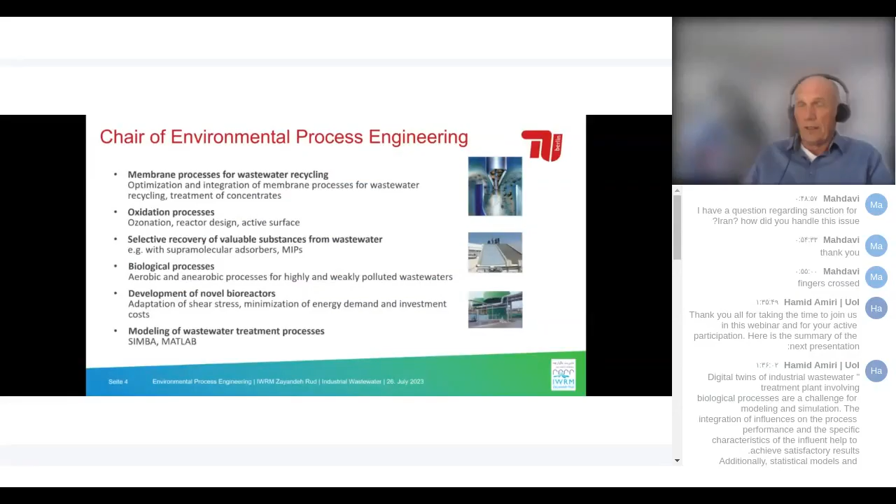Okay, thank you very much. A short introduction into the activities of the chair. So very briefly, I guess you all know these processes.

We are working on membrane processes for wastewater recycling, different types of membranes, also in combination with electric fields like electrodialysis or electrodialysis metathesis, but also conventional membrane separation like microfiltration, ultrafiltration, and in particular nanofiltration to reverse osmosis. We have a long tradition in the field of AOPs, advanced oxidation processes, where we also developed systems for efficient dissolving of ozone into water, and catalysts for ozonation and applying H2O2 in combination with iron, the so-called Fenton process.

We'll hear more details about selective recovery of valuables from wastewater, a field where we've been active for more than 10 years, trying to separate selectively substances which have a certain value out of effluents. This solves two challenges: one is that pollution of the wastewater is reduced, and secondly the financing, because wastewater at the end of the day costs money, and no one is really willing to pay for it, except if you have legal requirements or a shortage in water supply.

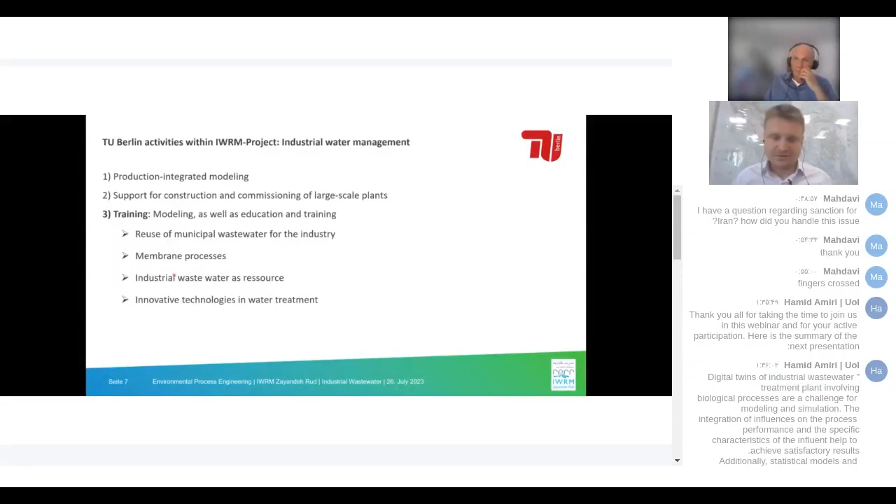I will continue with presenting 3 innovative industrial wastewater treatment systems that we have dimensioned, built, and planned in the last 3 years: the project InnoVa in Tunisia, the project SUSPIRE in Tunisia, and the project HighRec in Qatar and Iran.

Afterwards we have the presentation by Professor Geißen. He will present some key topics of industrial wastewater and especially wastewater reuse, looking at different perspectives.

My colleague Norman Schweimanns is an expert for automation and digitalization. He will talk about a digital twin for industrial wastewater treatment plants, a possibility to not only react but to predict operation parameters. This is very interesting, for example, for energetic optimization, or also for the reduction of chemical usage.

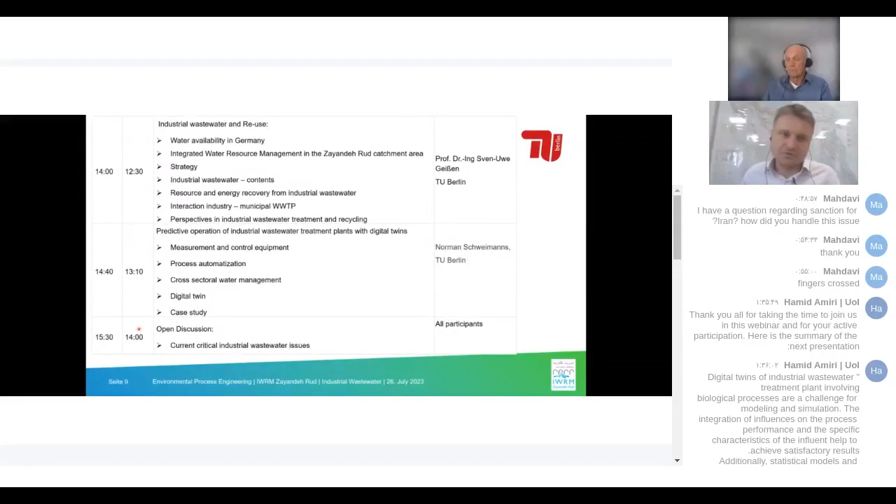And we will finish up with an open discussion, ask the experts. We have the opportunity to share ideas and discuss points.

Okay, thank you. I will now begin my presentation on the containerized industrial systems.

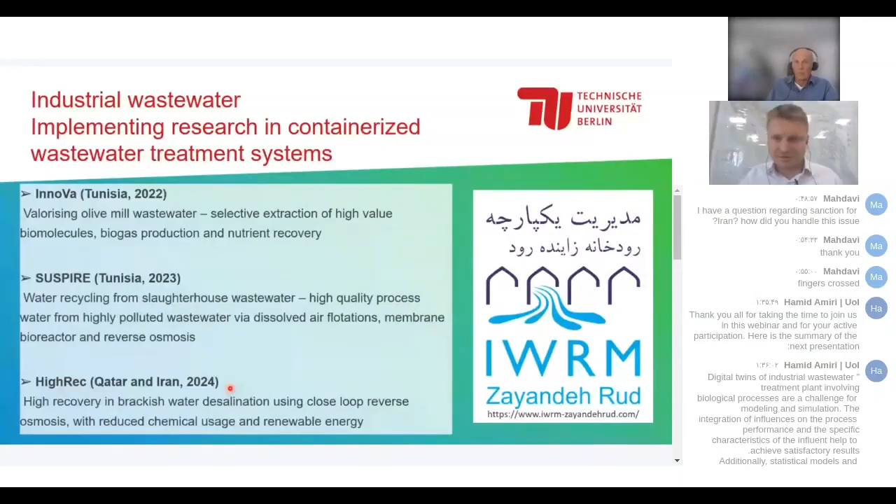So InnoVa. InnoVa started in 2020, due to Corona and other factors, shortages of supplies. It took 1.5 years to finalize the pilot plant. In February 2022, last year, we managed to import it to Tunisia. And in the last season, we began production in October, we treated about 12 tons of olive mill wastewater. The project is between TU Berlin, represented by Professor Geißen, and a long-term partner, Professor Sami Sayadi from the Center of Biotechnology in Sfax.

The process was awarded the German African Innovation Incentive Award. It's an award for very innovative research from Africa, sponsored by the Federal Ministry of Education and Research, Germany. The project is managed by the DLR. We worked together with a company, Delta Umwelttechnik. They constructed most of the system, and we had support by Endress+Hauser, which is a known company, I guess, in Iran as well. Artec Innovations, a ceramic membrane producer, and many other companies.

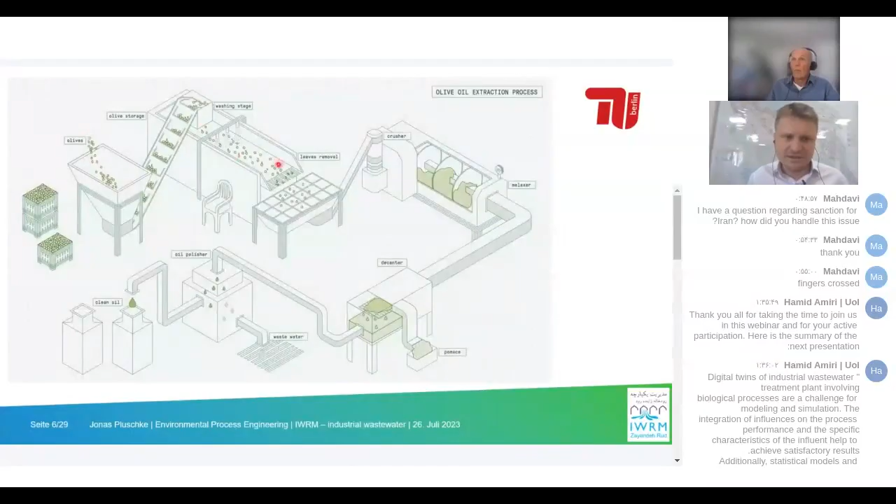So what is olive mill wastewater? We have to briefly look at what is olive oil production. We begin with olives. After storage and washing, you need to remove leaves and then crush the olives. The crushed olives are malaxed, so mixed at a certain temperature for some time. And then at some point, a decanter or centrifuge will remove the oil from the solids and water. So at some point in the process, we will find wastewater, and this is the wastewater we try to treat.

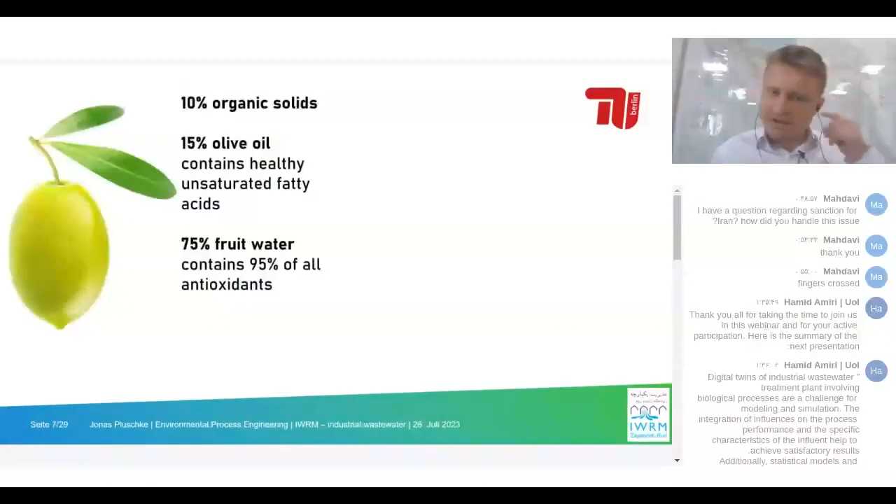What is olive mill wastewater specifically? It's the fruit water or the juice. The olive is a pretty dry fruit. It grows in very dry, arid areas. And to cope with the stress from dryness and the stress from UV light, it produces a lot of oxidants, antioxidants, and these can be found in the fruit water.

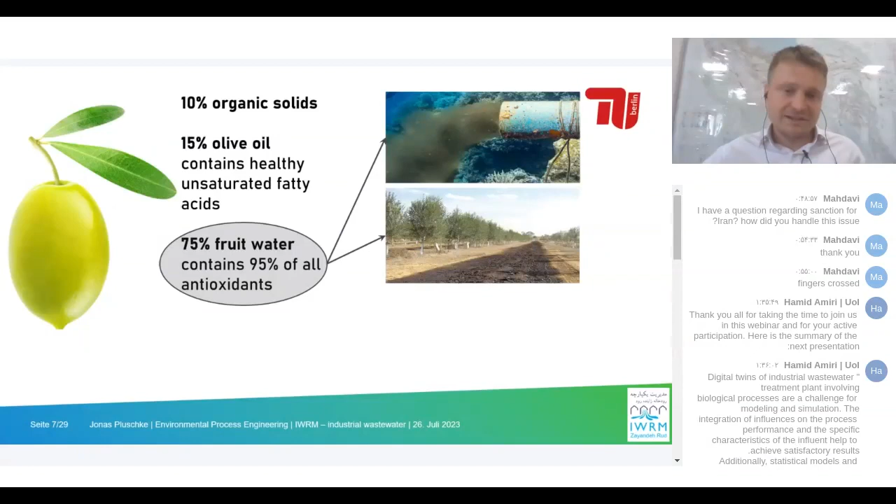What are the current solutions for fruit water or olive mill wastewater management? The main or a classical one is disposing it untreated into water bodies or the Mediterranean Sea. A method which is still applicable for small-scale farmers is using it as irrigation water in olive groves. This is possible as long as you don't have intensive agriculture. If you reach a certain intensity of the olives, the soil will be damaged. You have salts, you have fats, you have the accumulation of biomolecules, and in many areas in Spain, for example, or in Palestine, I know examples where the soil is degraded so much that it cannot take up any water anymore.

And then a method also very well known in Iran is the evaporation pond, often used for reject water from RO systems. This water in Tunisia is often also discharged in large evaporation ponds, and the arid climate reduces the volume to more or less a solid.

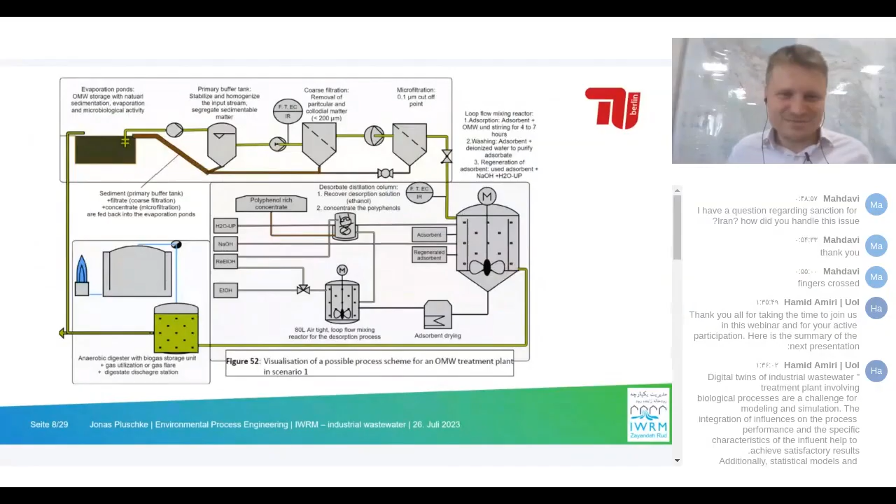So this is a flow scheme I prepared in my master thesis. It looks a little bit rough, but this was the first plan on how can we valorize this wastewater. Simplified, we have a storage of the raw olive mill wastewater. If needed, enzymatic treatment is possible to degrade large polyphenols into smaller monomers of higher value. Then we have a mechanical treatment and ultrafiltration. We upgraded the system so that these components are now also used for the anaerobic digestion.

The permeate of the ultrafiltration, about 70-75% of the initial amount, is given into an adsorption column, and the bulk will afterwards go into a storage and be the feed for the anaerobic digester for biogas production. In many other countries, the gas prices are much higher than in Iran, and so the production of biogas is often an economically viable option.

The reclamation of the polyphenols is then done on the adsorption column. We use an organic solvent to desorb our target molecules and further purify and concentrate them.

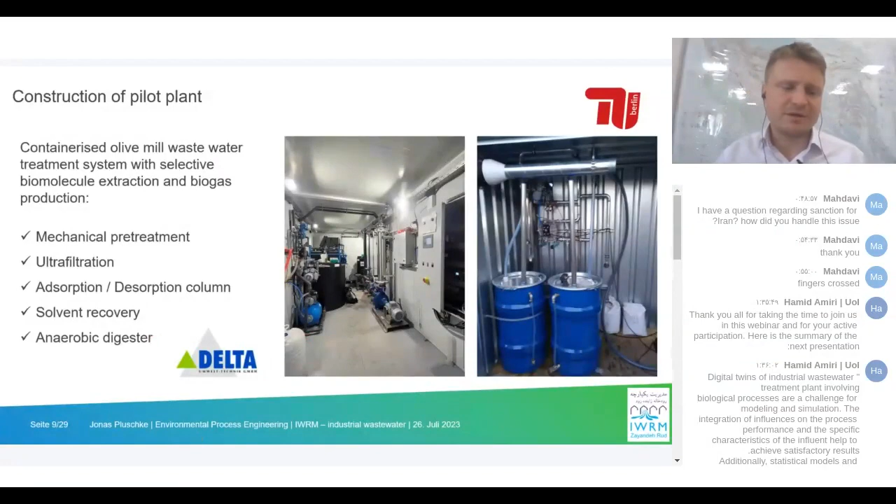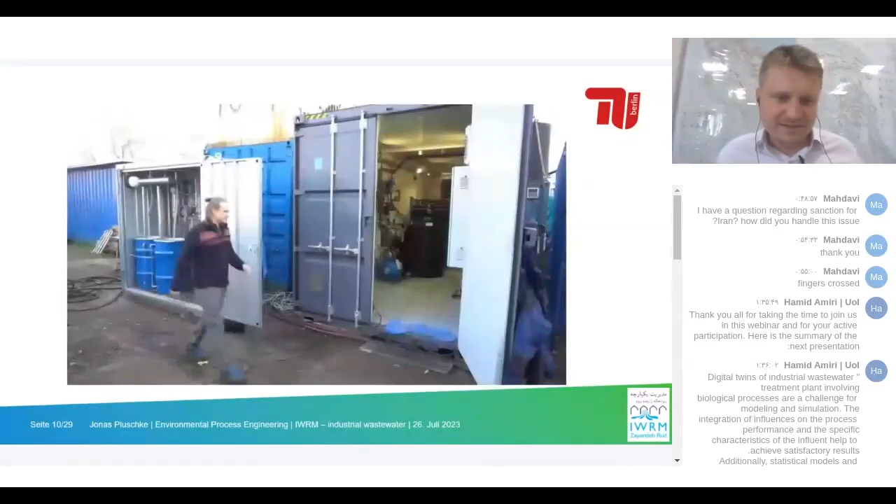This is a very short impression of the system in Germany before shipment. As you can see, it was a bit cold.

So these are some impressions of the system before the export to Tunisia. In June last year, we had an opening ceremony with many stakeholders from different areas of Tunisia and different backgrounds.

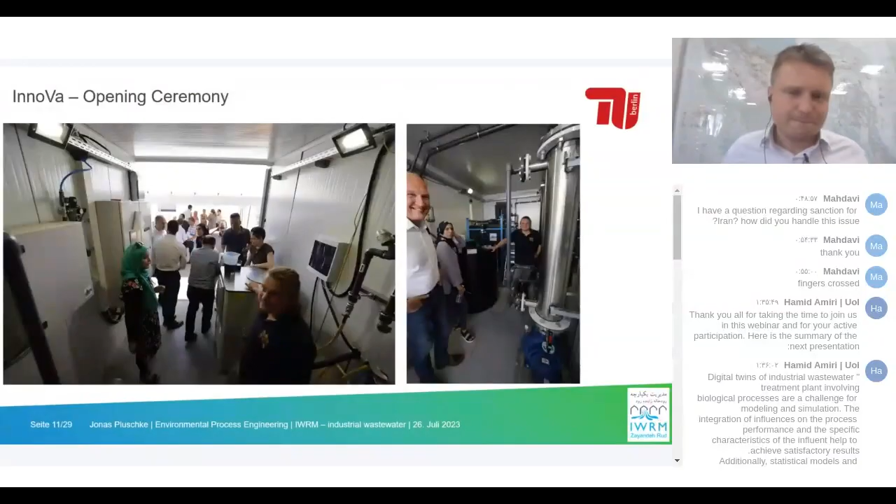And we finally could begin operation. The olive mill season begins in October. In November, we started with a team of 3 master students from Germany and the team from Tunisia to start learning on the real life application of the process, and started optimizing as well.

And the goal was achieved. We managed to recover polyphenols of high value, and we're currently still trying to further purify them with different assays and trying to find commercialization, finding a partner to utilize them on an industrial scale.

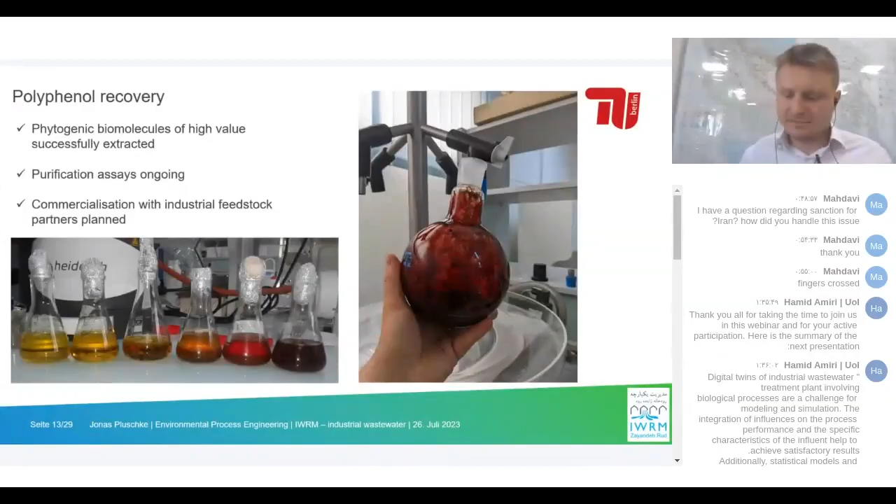Masoud and Hamid, do you want to translate at this point? Thank you so much for your nice presentation. Yes, of course I can do it.

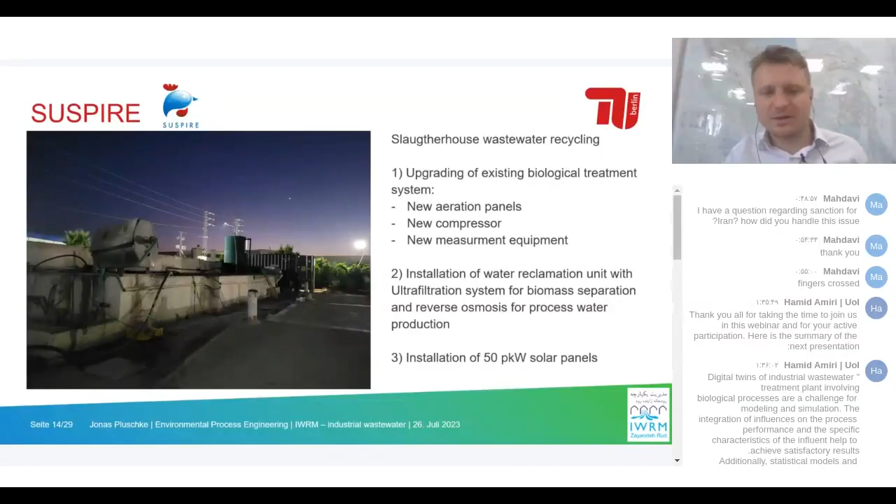This is something that I recommended already to a lot of my Iranian partners and that I had a chance to talk to. Solar panels are able to produce very cheap electricity, and we try to improve the sustainability of our systems, for example, by incorporating solar panels. We installed about 50 kilowatt peak together with our industrial partner.

So this is Maximilian Philipp. He had his first child this year and was on paternity leave, and I took over in the crucial phase of installing the system. The idea is using process water for the slaughterhouse.

This generates wastewater. Then we have a mixture of a flotation and MBR system to treat the organic components and remove most of the nutrients. So we are left with water that mainly contains ions, and we use a reverse osmosis system to produce high quality process water, which can then be used in the process again.

Meanwhile, we try to use biogas and photovoltaic to generate energy for the process and use the residues for agricultural purposes.

The project is funded by a line called TUNGER 2+2, meaning we need two Tunisian partners: one research partner, the Centre de Recherche et de Technologie des Eaux, a research center about water, and one industrial partner, the slaughterhouse. Then we have two German partners, TU Berlin, represented by us, and Delta Umwelttechnik, the site constructor. The whole project was financed by the Federal Ministry of Education and Research Germany, as well as some funding by the Tunisian side. The DLR is the project coordinator.

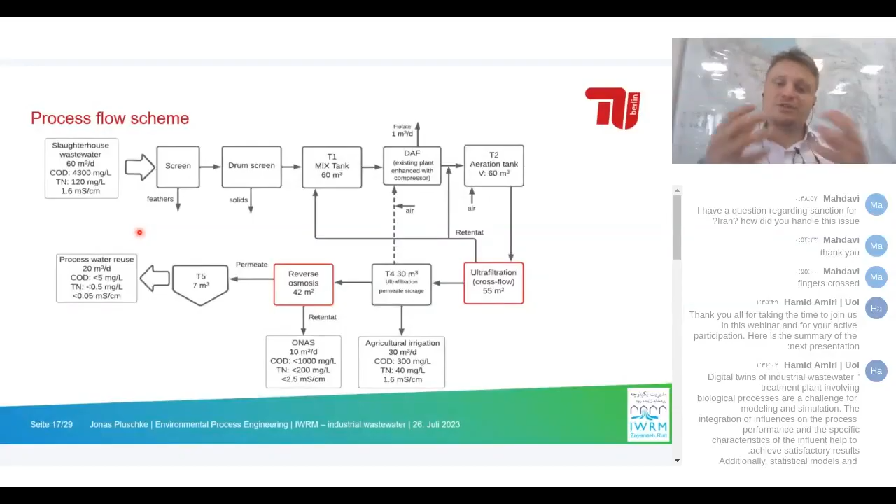So this is the flow scheme. We have a typical slaughterhouse wastewater with about 4 to 5 grams of COD, about 60 cubic meters per day. It's small scale, decentralized - this is one of the ideas. One advantage of decentralized systems is the water system in general becomes more resilient. The direct opposite is, for example, bringing desalinated water from the Persian Gulf. This is a very centralized system, and if you have issues with the desalination system or the pipeline, a lot of issues can be created. With decentralized systems, the general system can react to change a little more easily. That's why we are interested in researching and providing case studies for these decentralized systems, even if they might be less economic to a certain degree.

The wastewater is given into a mechanical pretreatment, a drum screen. We have a homogenization tank, then a dissolved air flotation, a process I am a big fan of, because depending on the wastewater, you can remove a large amount of organic matter with very low usage of chemicals, if at all - some DAFs work perfectly fine without any chemical addition. Then we have an aeration system, an ultrafiltration for recovering the biomass. The permeate of the ultrafiltration is given into a reverse osmosis system, producing about 20 cubic meters of permeate per day, with a goal of 50 microsiemens per centimeter.

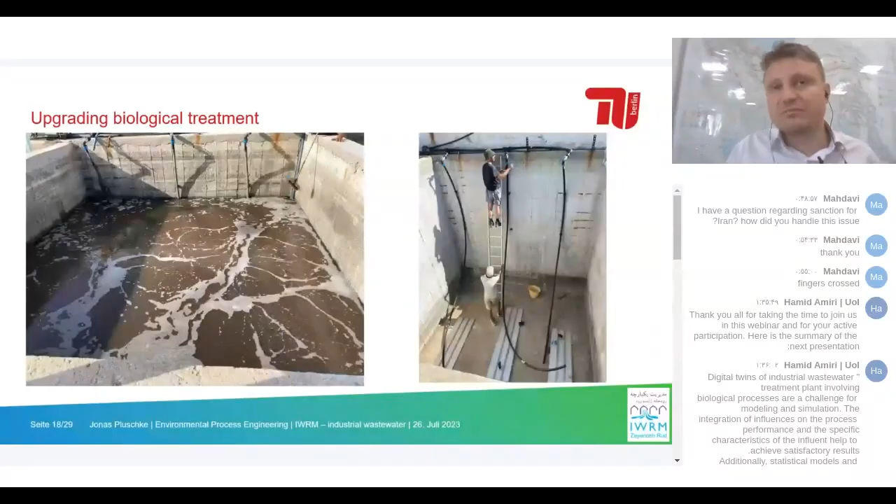So these are images from June. One of the important works was installing the new aeration panels - high-tech aeration panels from Germany, which use membranes to diffuse very small bubbles and have maximum efficiency in oxygen transfer from the air to the liquid. So we were able to produce a much more efficient system by increasing the oxygen transfer.

Because we're a university, we always have a component of teaching. So in the beginning it always looks a little rough, but we always try to bring students with us to give them the opportunity to have real-life application experience. My experience is that students profit a lot from participating in such projects.

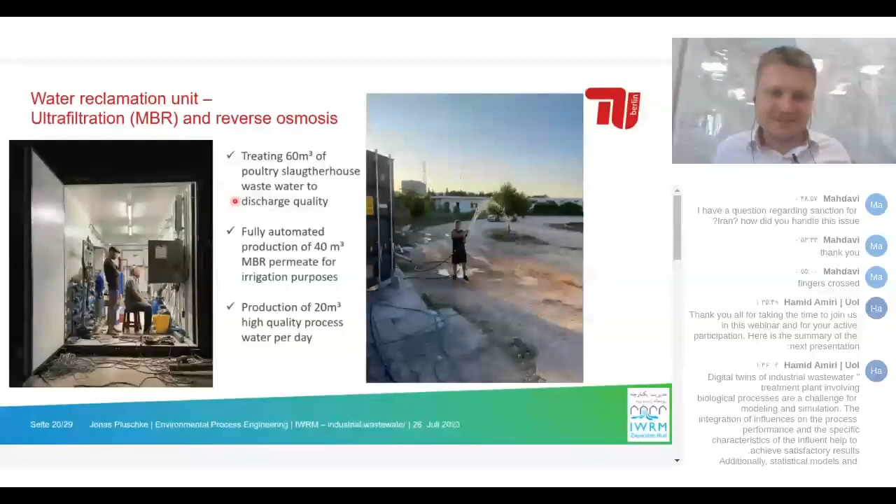We are able to treat 60 cubic meters of poultry wastewater to a discharge quality much better than before. We have a fully automated production of 40 cubic meters of MBR permeate, which is quality-wise definitely good for irrigation, still containing some nutrients. And about 20 cubic meters of high-quality processed water per day is what's possible at the moment. We try to increase this value, but for now we are happy with the system as it is.

Okay, do you want to translate again?

This is the last slide for SUSPIRE.

Thank you, Jonas, for your very nice presentation. As I remember, we had the discussion last night about the translation, and I see the audience is mostly postgraduate. Last time there was a correspondent from a news agency and I was forced to translate, but I think if the audience has any ambiguity or anything unclear they want clarified, they can ask the question. I suggest we continue because the slides and your speech are all clear. Wonderful, thank you, thank you.

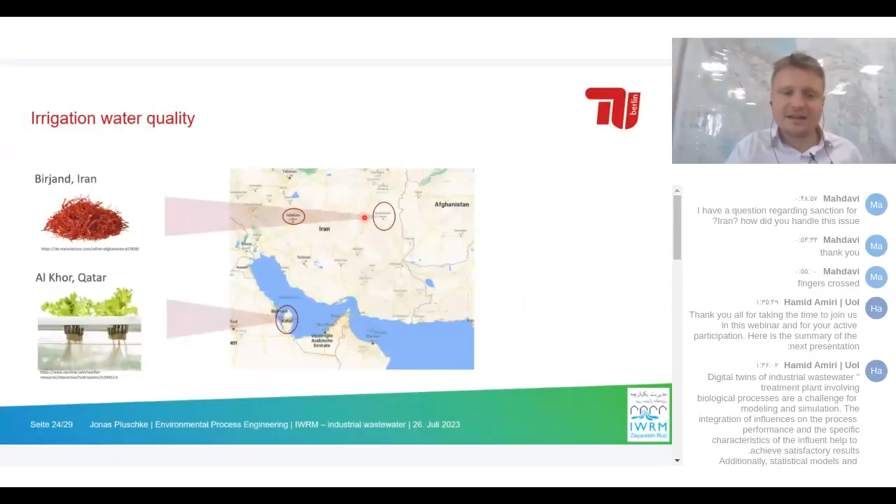So there's two regions where we're going to test our system. One is in Al Khor in Qatar, which uses hydroponic systems for the production of vegetables, and already has a desalination system running, so we can compare the performance of their system and our system. And then the other region, in eastern Iran, is Birjand, for the production of saffron.

So these are just the key points of the HighRec project. We want a highly flexible solar-driven desalination system, so the flexibility of the system is important. We want dynamic adaptation to changing raw water compositions.

This is something we learned, or was new to me, that the water composition in the groundwater can change over a year in certain cycles. And then we have the concentration of the concentrates to the maximum possible, to a threshold salinity, and therefore maximize water recovery.

And the focus points are the chemical reduced pretreatment technologies. So we are looking at electrodialysis metathesis and capacitive deionization, ion exchange systems, or nanofiltration. We had a very successful project where removing hardness using nanofiltration was a good option. Then technical and economical evaluation of minimal and zero liquid discharge concepts.

And of course, we always try to have a holistic technology transfer program with operational and maintenance courses to have a sustainably running system.

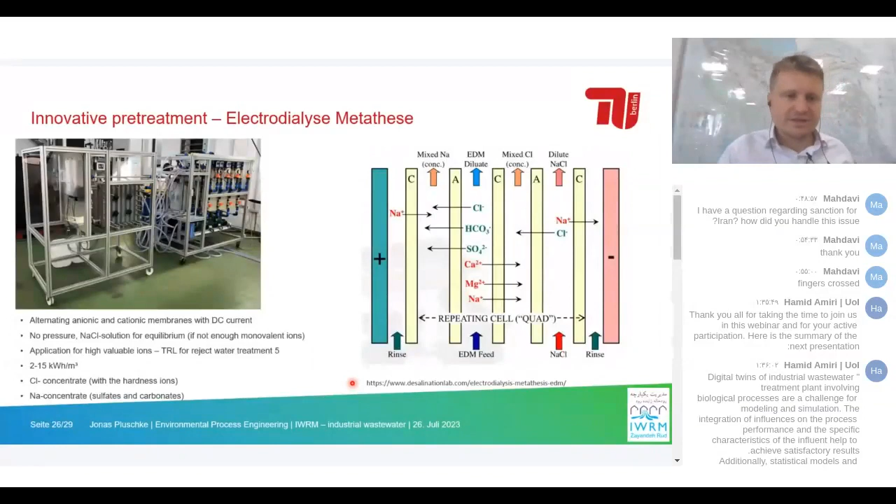Just one example of an innovative pretreatment: we are looking at electrodialysis metathesis. It's a process that uses alternating anionic and cationic membranes and a DC current to separate charged particles or ions. It doesn't use any pressure, which reduces fouling a little bit, and is used mostly for high valuable ions.

But with increasing technology readiness level for the system, we're starting to see applications for reject water from reverse osmosis systems. The value was given between 2 and 15 kilowatt hours per cubic meter of treated water. We end up with a chloric concentrate, which contains all of the hardness, so calcium, magnesium, and sodium, and then we have a sodium concentrate, which contains the sulfates and carbonates.

So we managed to separate the divalent anions and divalent cations before going into the membrane, and many times calcium, magnesium, as well as sulfate are the ions that will produce scaling. In some cases, silica or other ions can be an issue, but this is a good pretreatment to remove hardness or to separate the ions.

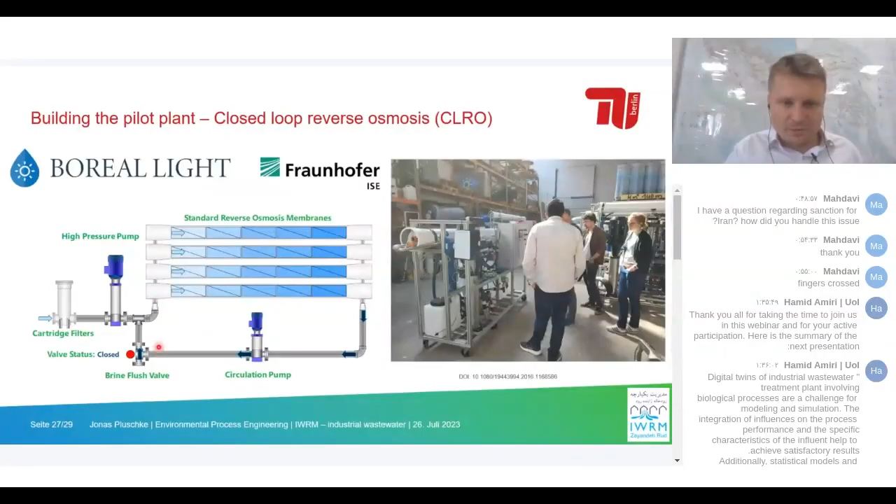So we started constructing our closed loop reverse osmosis system with the company Boreal Light. The idea is you have a normal membrane system, you concentrate the feed and circulate it. The whole time permeate is produced, and the salinity in the feed increases step by step. Instead of doing 2 stages or 1 stage, you increase the pressure step by step, and you can go much higher than with a single or two-stage RO system. So the brines can go up to 100 grams TDS per liter.

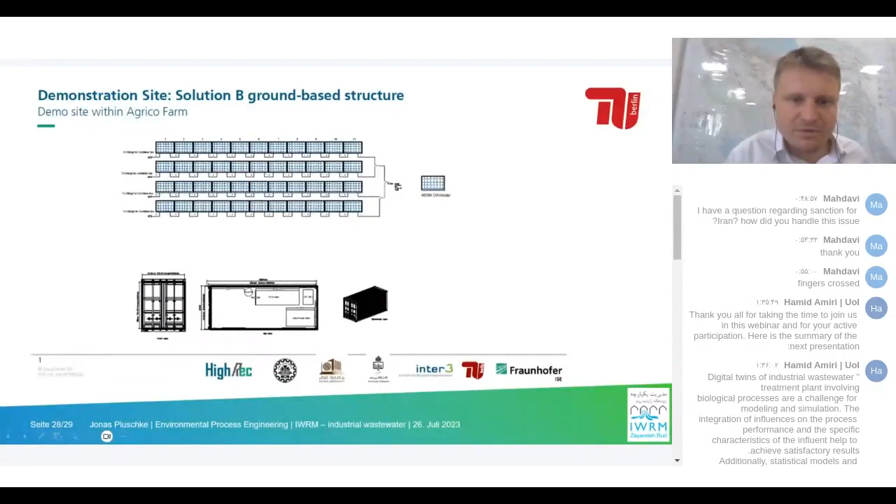This is the plan for the HighRec system. We want to bring about 50 kilowatts of solar panels, and the whole rest of the system will fit into a 20-foot container.

I want to thank you, and I am open for questions if there are any. Merci.

Thank you, Jonas, for your nice presentation. I think you can ask questions, and I have some questions too, for the MBR system, as you said, in the slaughterhouse as well as in Tunisia. It was interesting, both the olive mill and slaughterhouse.

I have a question on the MBR system, which, as you said, is an external system, but many books or references preferably suggest the submerged system. I want to know why you chose this system at the design stage, and how did you manage the fouling problem, because it's not submerged and it's outer?

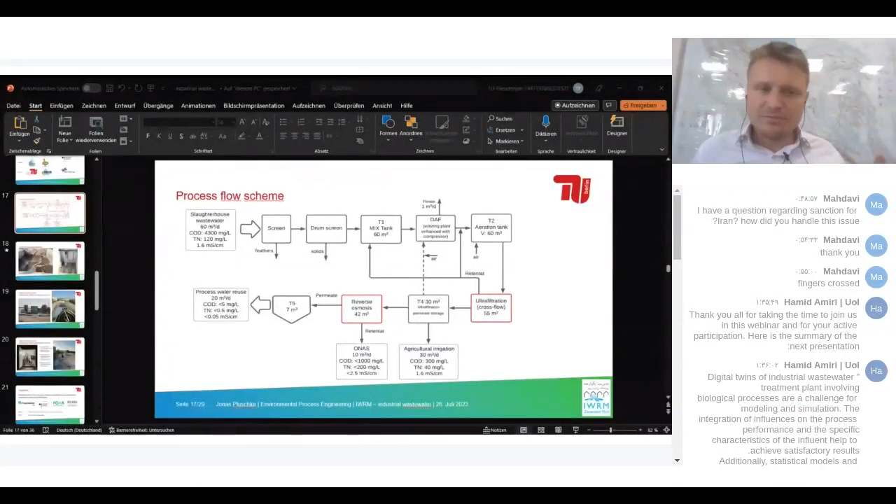The cleaning in place is much easier too, because you don't have to take out all of the membranes and put them into a separate smaller tank. You can just empty the system, fill it with water, and use the installed CIP system to more or less regularly chemically treat the membranes. So these are just two points which have an advantage.

In our case, it was also because we are in a rural area of Tunisia. It's a decentralized system, and we will bring high-end technology. Installation of submerged membranes is not very simple. If we do it separately and already finish installation inside the container, the whole system is ready to go once the container arrives, more or less. So these were a few of the reasons why, in our case, it made sense.

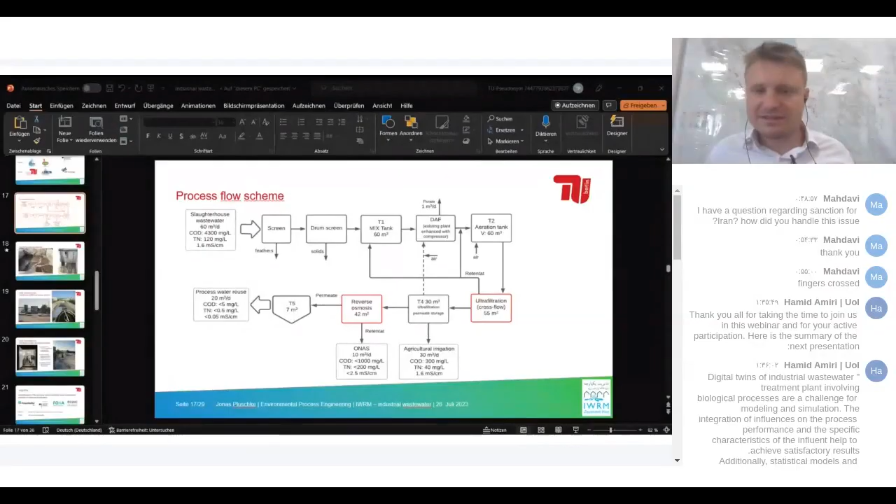How much was the MLSS of your system? Yeah, so for aeration tank, we began at a very low rate, of course, and our calculations were based on 10 grams. That's what we based this whole system on. Do you want to add something?

Yes, I think that's a general question. You're completely right. Now, whether to choose a submerged system or a cross-flow system.

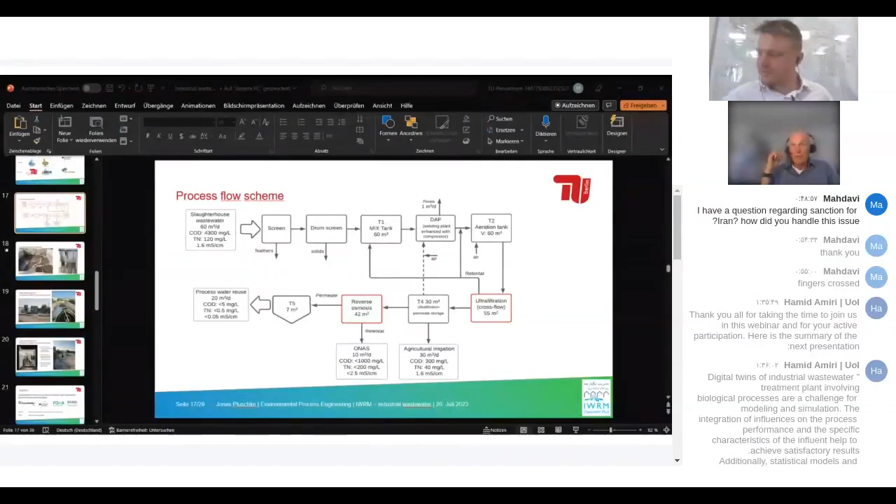From experience, I think with both systems we started in the 90s with cross-flow systems in the treatment of landfill leachate wastewater effluents, and then we moved into industrial applications, and then finally also municipal applications. But basically, submerged systems have the great advantage that they are much cheaper and have less energy consumption. But you need more surface area for sure.

So the specific flux through the membranes is, for submerged systems, in the range of 15 liters per square meter an hour. And for cross-flow systems, about 80, 90, and in the best case, above 100 liters per square meter an hour. But they are consuming more energy.

But they are much more resistant, as Jonas just said, against the layers. So the layers can be better controlled. So if you have any concerns about the deposition of substance on top of the membranes, you should use a cross-flow membrane filtration system.

So for me personally, to keep it simple: for municipal wastewater, every time, if you would like to install an MBR, use a submerged system. For industry, usually apply a cross-flow system, because it's much better to maintain. The maintenance is easier, as Jonas just mentioned, and so is the cost.

Finally, the higher energy cost is not so important in the industry because we're talking about smaller flow rates.

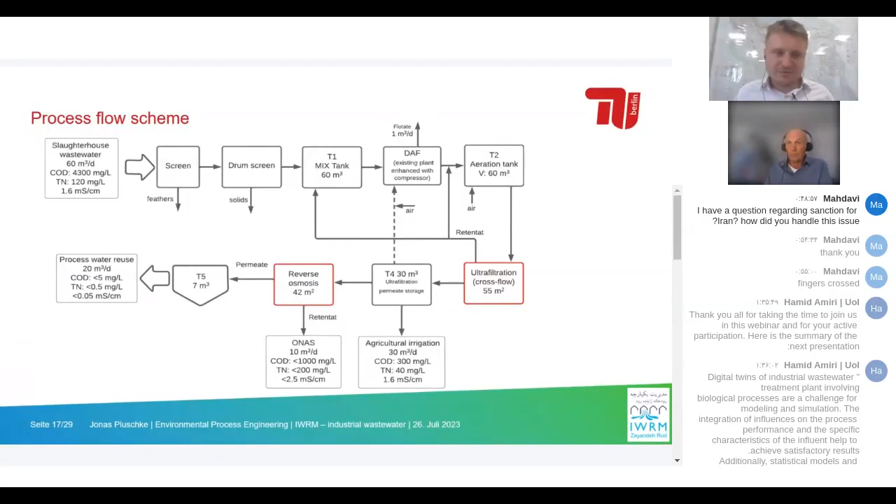We visited, as Professor Geißen may know, one of the industrial plants in Isfahan operating a submerged system, and Jonas suggested converting it to a UF system. It was our question how to change it, and I had some suggestion to change the system from submerged to external.

Maybe I can explain really quickly because it's a very interesting case. They are currently using 2 grams MLSS in their MBR system because they have an aeration tank and a whole biological treatment in front of the MBR system, so they go in with a very low concentration. My thought was to just separate the biomass with sedimentation before the MBR system and use the MBR as an ultrafiltration system without biological treatment.

Okay, thank you. I'm not sure, but this has a disadvantage in that you're separating out the good settling flocks, the large-size flocks, and leaving the single bacteria for the MBR. This might cause a very condensed deposit layer at the MBR, because the particle size is smaller. You're making a particle size separation in sedimentation.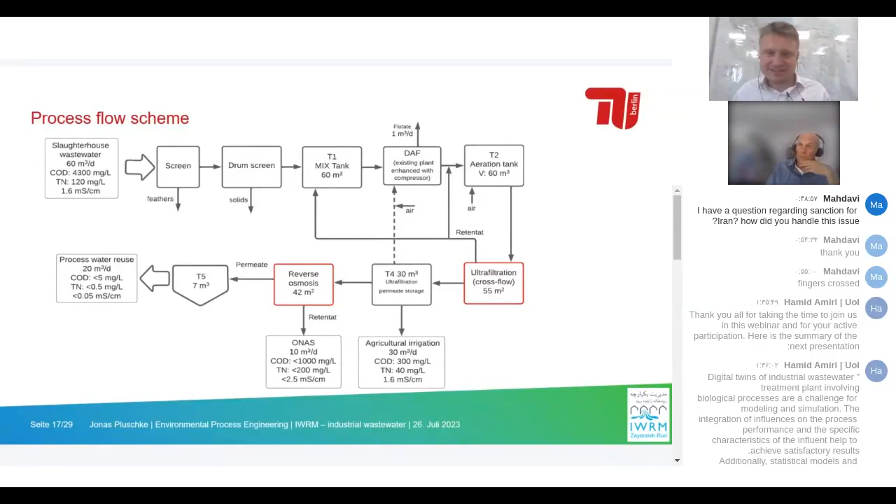The pilot will go to Qatar by the end of this year, and we will see if the sanctions allow importation to Iran or not. We still have to find out.

I think it should be no problem. So the information so far is that it should be no problem, because it's not dual use, and secondly, it's research. That's the information we've received so far. But let's wait - we do not have a final decision on this issue.

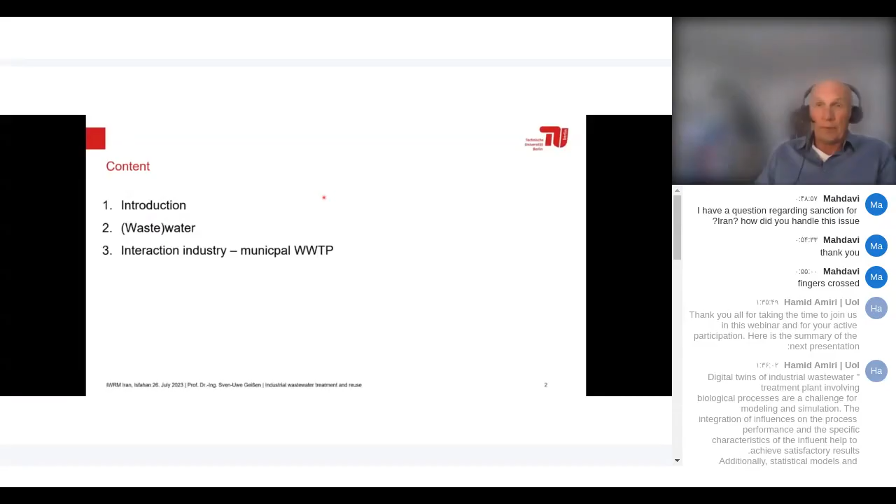Moving into my presentation, I will start with an introduction. I will give you an overview on wastewater or water, because water is contained in wastewater, and that's something we have to address. And last but not least, the interaction between industry and municipal wastewater treatment plants is also quite interesting to discuss.

So, introduction. I already mentioned what we are doing, but I would like to give you an insight into what exactly we do in many applications. We are starting with these kinds of plants. It's acrylic glass, so you can see inside a bioreactor, not filled with biomass at the moment the picture was taken. But it's very important for us to have insight into the system, to use our senses: our eyes, our nose, our ears, and our taste in some cases—even in most cases not for the wastewater, but sometimes you should use your taste too.

We have highly sophisticated measurement devices, but our senses, the human senses, are unbelievably good. But this is not the story I'd like to tell you.

I just like to address that we are moving into the scale-up, the integration into practice—that's challenging. We are talking here about a water column height of about 1 meter, and in this type of reactor at full scale, we are talking about a water height of approximately 12 meters. That's what we are doing: transferring technologies from the lab scale, bench scale, into practice.

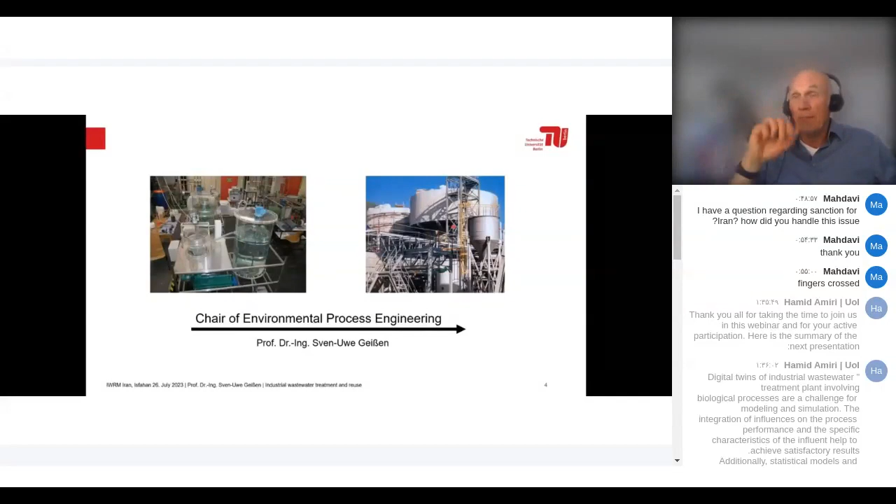So you have seen some examples, and hopefully in the future the examples Jonas gave will also be installed at full scale, without external funding, just with private money.

So, what is the water situation in Germany? We have summer now, and just today there came some news with respect to our groundwater level. Even in Germany, there are many concerns about groundwater and water supply, particularly in the region around Berlin. The spokesman of the Greens gave a short sentence: it was last year, when we had such times of water scarcity, priority must be given to public water supply quite consistently.

And this is a question also addressing Isfahan, or Iran, or the whole region in general: who gets the water finally? If there's water shortage, what is the priority of water supply? This is a real challenging question, and it has to be addressed very early to answer.

We have another comment from the vice chairman of our party, CDU-CSU parliamentary group in the German Bundestag, Stefan Bilger: if power plants need to be cooled, then that is in all our interest. If agriculture needs water to grow food regionally, then it's also in all our interest. That's something you can transfer directly to your own experience.

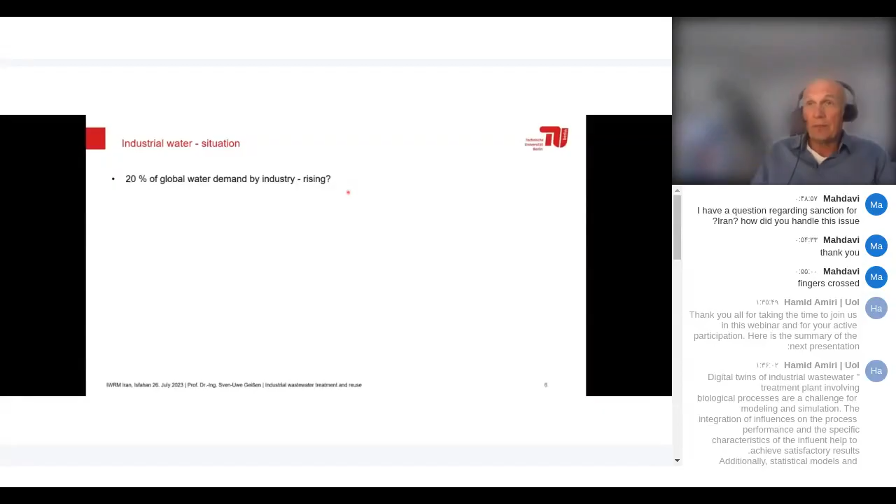What is the situation globally? 20% of the water demand is related to industry. As you know, the largest demand is related to agriculture, but it's 20%. And the question is: is it rising? That's a very important question. From my point of view, to give you a short answer: no, because you can increase your production capacity without rising your water demand or water usage.

It's not a consumption—that's also very important. Industrial wastewater can contain non-natural, difficult to degrade, and toxic substances. Some colleagues have heard about micropollutants and microplastics, and industry does release these, the pharmaceutical industry for example. But the amount of these substances released is not related to production, it's related to the population—to us, as we use plastic products and pharmaceuticals. So all of us, including me, are releasing those substances into the environment.

And finally via the municipal wastewater treatment plants. It's contained—we have non-natural substances which are difficult to degrade, and this has to be discussed with respect to the indirect discharge into wastewater treatment plants, into municipal wastewater treatment plants, because they flow through and finally end up in the water bodies.

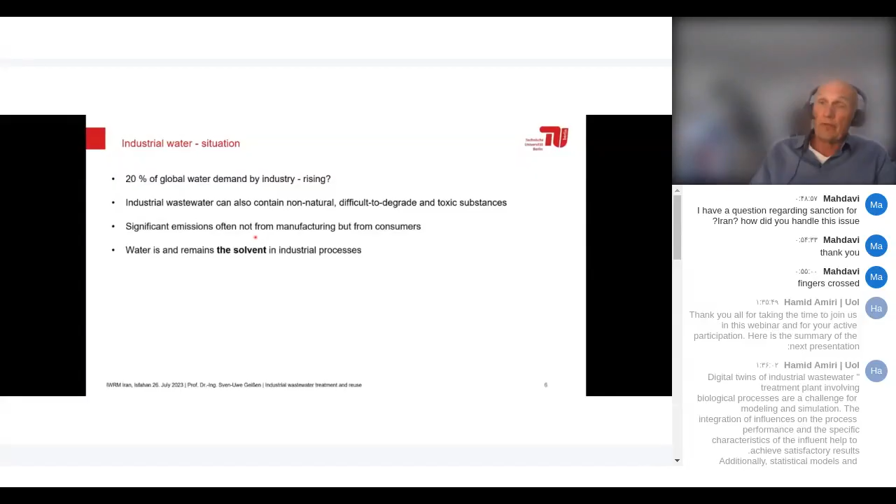Significant emissions, often not from manufacturing, but from consumers, from us, from the population. And this is a statement that holds true for the future too, as we transition more into circular economy—the industrial circular economy. So we have biologization: more and more processes are moving away from oil-based products into renewable substrates used for production, the biologization of production processes.

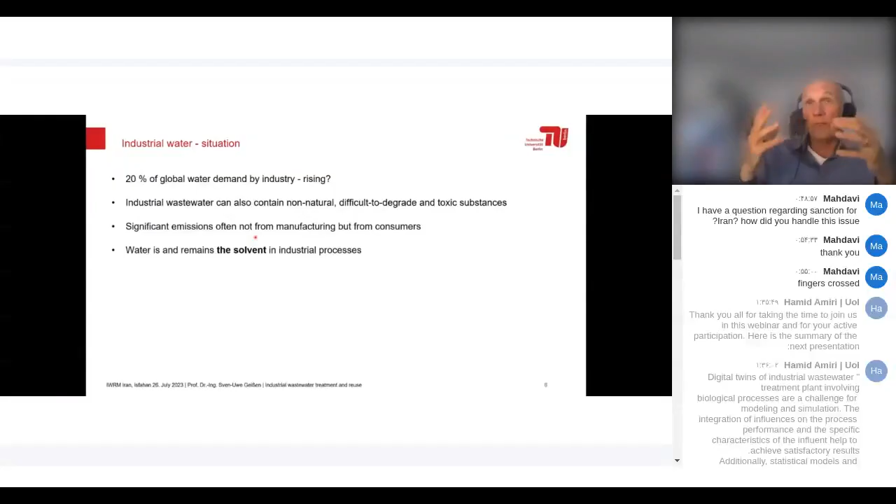At the moment there is a very strong shift happening. There isn't much information available publicly, but I can tell you from my work in the specialist group that a lot of development is taking place. However, even if you move into biological production or using renewables for production processes, water is and remains and will be the most important solvent for industrial processes. That's for sure, and additionally for cooling, because it's the easiest way—to evaporate water or by direct cooling. That's something you know in Isfahan.

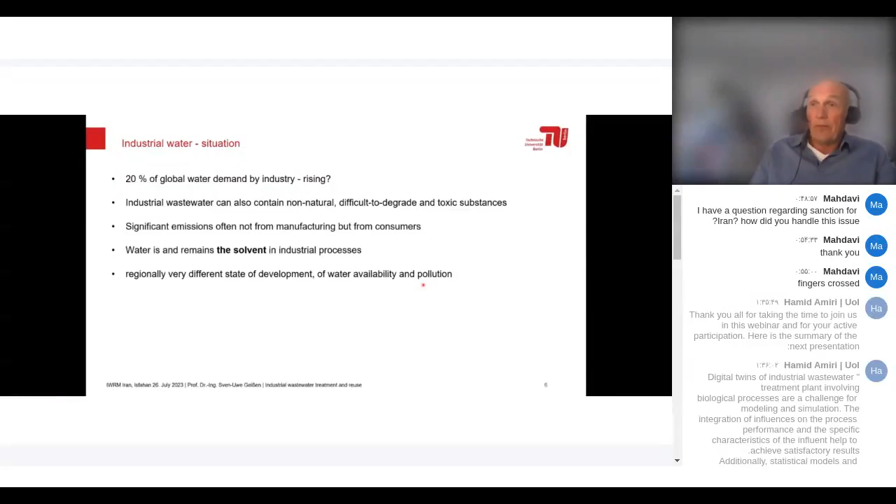We have regionally very different states of development of water availability and pollution. If you look at the global scale—you're in Iran, but if you look to Turkmenistan, China, Indonesia, Australia, Chile, or Bolivia, we have completely different situations. Therefore we have to look at the regional scale.

That's the main message. What we're also observing all around the world: we have projects actually running in South America, in Chile, lithium production, which will start soon. We have a project at the Pacific Islands, in Fiji, looking at water supply. We have a project in Vietnam for industrial water reuse. We have projects in North Africa, from Morocco via Tunisia to Egypt and Jordan, and finally to Iran and Qatar. So we have many projects more or less all around the world.

What we're observing is increased competition, not only in Iran but also in other places around the world, and it will become even stronger. If you look at the huge irrigation projects in Egypt, for example, where they're taking about 10% of Nile water in the southern part of Egypt, not in the Nile River Delta but in the southern part, it's clear this water is missing downflow in the Delta, where a lot of agriculture takes place. So the competition, even amongst agricultural applications, will increase.

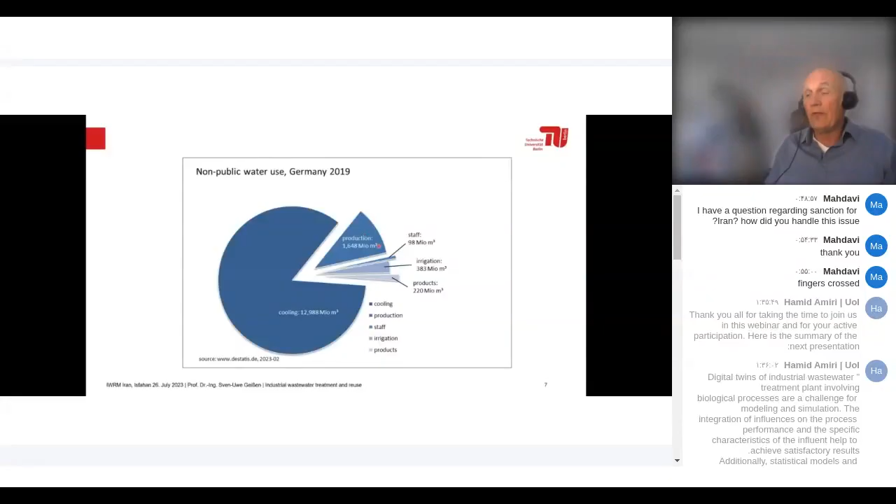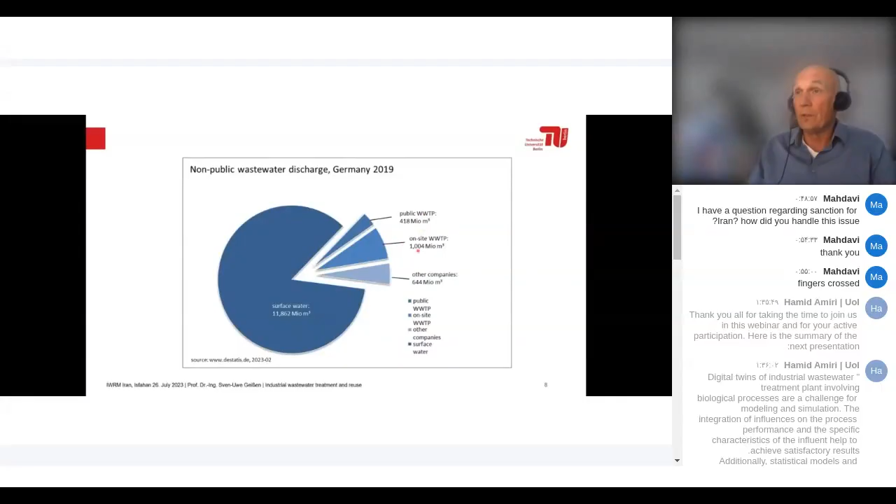You can say cooling is not so important because we're releasing the water afterwards. But if you're looking at evaporation cooling, you're evaporating huge amounts of water. Additionally, we're adding chemicals like antiscalants and biocides to prevent biofilms in the heat exchanging systems, and therefore we're releasing chemicals into the environment via this cooling. So it's not only a question of quantity, but also quality, both.

Wastewater discharge in Germany in 2019, basically to surface water. The industry is discharging directly into surface water. We have public wastewater treatment plants and on-site wastewater treatment plants. So basically it's released into surface water.

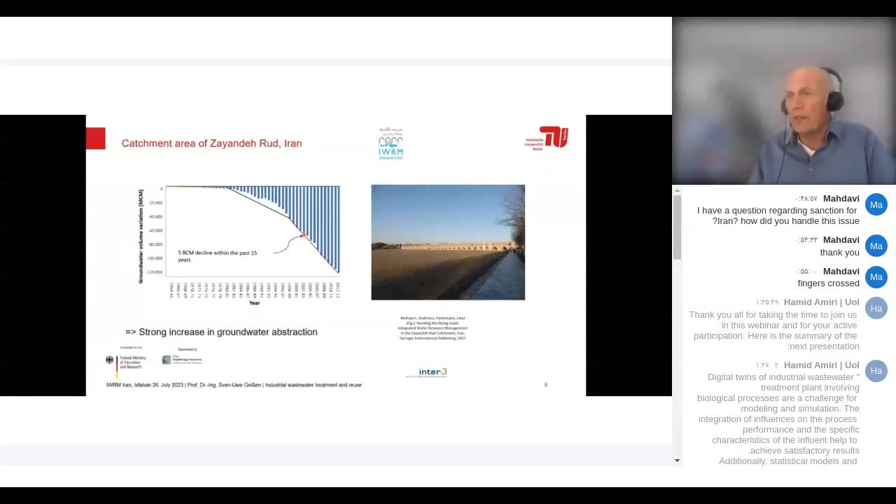Now something I can briefly go through is the decline of the groundwater level. This data was received from Inter 3, published in 2017 by Springer Verlag. You can read it here. It's a pity we cannot see the groundwater level directly, but nevertheless we can see that wells have to be dug deeper and deeper into the ground in order to get sufficient water supply.

This was the catchment area - that was also an outcome of our IWRM project, which we introduced to you earlier. So that's the water demand in order of priority.

First of all, households. The environment is something we don't have to forget - the green gardens need water too, and humans need these greens, particularly in cities, to have a balanced climate inside the city. So we should not forget the environment, which requires also water.

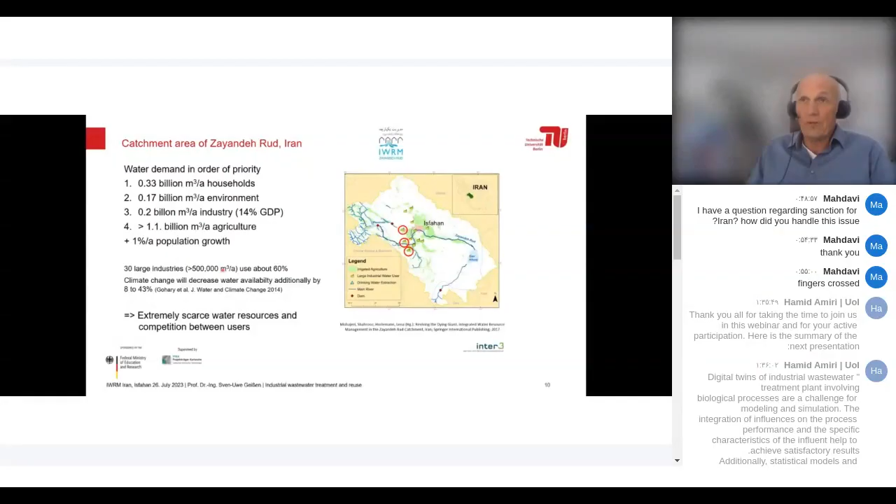Industry is important - I think that's nothing new. The contribution is 14% to the gross national domestic product in Iran, in the region of Isfahan. So it's very important, but the largest amount again is for agriculture.

I will not go into all these details because I guess you know them, and you can look into my presentation later on.

Reduction of water extraction by application of water management systems is something which is for sure needed. You need water management in industry - you have to know where the water goes, what is the temperature. Not only the quantity of water, you need also the quality - that means with respect to composition, the carbonous substances, but also the ions, the salts. You need the heavy metal concentration, and finally you need also the temperature, which is very important.

You know the specific heat capacity of water is extremely high, and therefore the energy related to temperature, or to heat, to enthalpy in water, is significant.

Optimization - use of treated municipal wastewater is an option, with different qualities. We discussed already half an hour ago the question of whether to use a submerged MBR or cross-flow MBR. Finally, after an MBR you're producing high quality water - it doesn't contain any viruses or bacteria anymore, and it doesn't contain larger particles, but it still contains some organics, ammonia and phosphorus. Nevertheless, for some applications like car cleaning or truck cleaning, you can utilize this water directly. It's essential to think about the different qualities demanded in industrial processes.

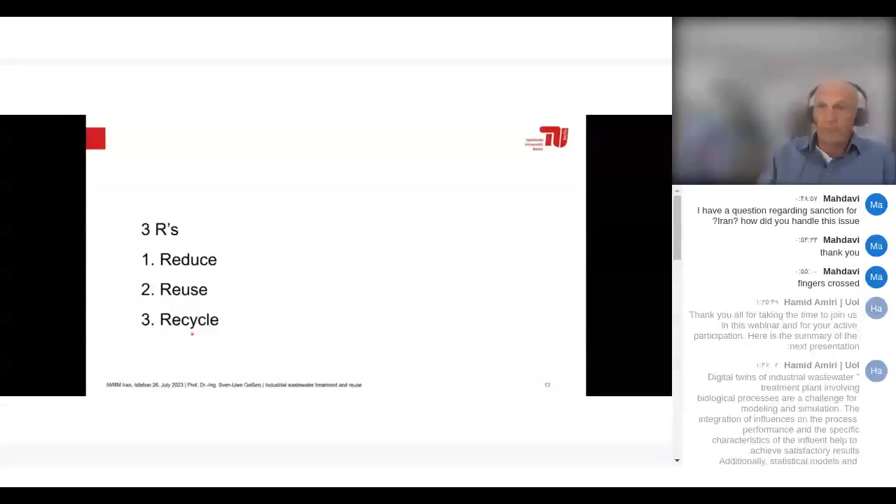Last but not least, implementation of recycling technologies, which is already done or under implementation. Again, the question was already mentioned by my colleague - what about the concentrates from membrane filtration? Going into that question - that's most important. This would be my answer to the question which was asked before.

For me, it's very important not only to talk about recycling, but we have to talk about reduction of water use. That's very important. I know that the Iranian, particularly the Isfahan-located steel companies, have a very low water footprint. I would say they are very competitive on a worldwide scale, looking at the amount of water used for production of one ton of steel.

But I also remember an event when I visited Isfahan before the pandemic. I went into one of the parks of Isfahan, and the gardeners just took a hose and let the water flow out in order to flush, and finally the water ended up on the street and flowed away. This is something which should not happen.

So that's very easy. That starts with reduction. In each and every place, we have to think about reduction and more efficient irrigation in agriculture, but also for irrigation of the greens, it should be more efficient and adjusted. And also at home.

So the question is, how much water do we need at home? Ask yourself, how much water is really required? Do you really need 200 liters per day? Or do you need 80 liters or 50 liters, as recommended, or the minimum of the World Health Organization? Personally, I would say to feel comfortable, I don't need much water. So that's a question which starts with ourselves.

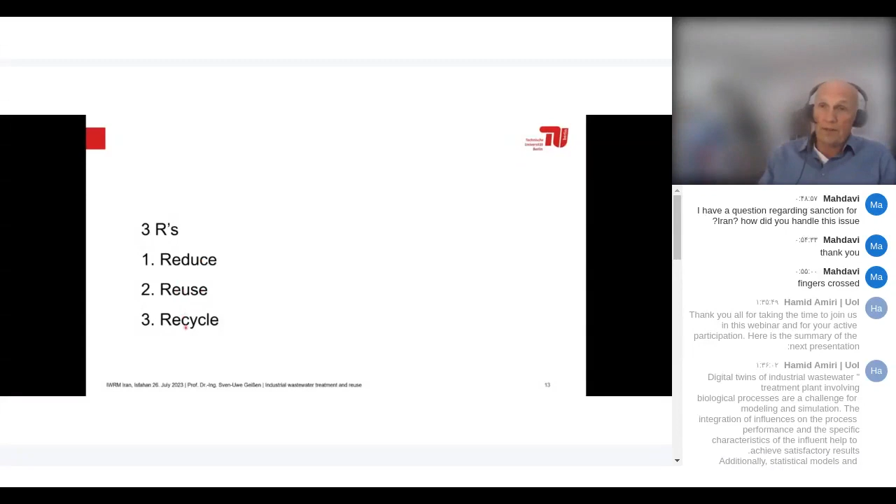And reuse is something which is also very easy to do. Check the concentration - reuse means you don't apply any technology to treat the water, just reuse it directly. For some applications, it might be possible. And recycling, we will discuss - I will present, as already presented by Jonas, in the following slides.

But looking at the water drop, or what is in the water - as I mentioned earlier, waste goes into brackets. For me, basically, wastewater is first of all water. That's the point. We have water. Unfortunately, in the water, we also have energy, as already mentioned.

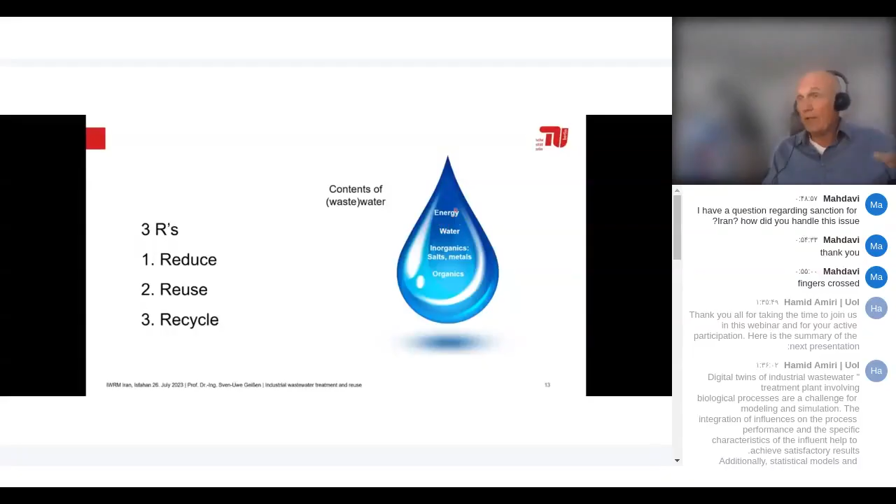So the temperature - calculate yourself. You can easily do so with the specific heat capacity of water. You can easily calculate the energy required to heat up water from 20 degrees to 40 degrees, or to 100 degrees in your boiler in the morning when you prepare your tea. You need a lot of energy to heat it up, and for cooling it's the same. So we have to take the temperature into consideration.

So in water, for sure, we have the inorganics - the salts and the metals - and finally we have the organics.

Looking briefly at energy and what is contained in form of energy - I have one example. You can change the numbers, but this is a beverage industry example: drinks are produced in a factory of 1 million hectoliter - hectoliter is 100 liters - sales of beverage per year. That's production, a medium-sized production facility.

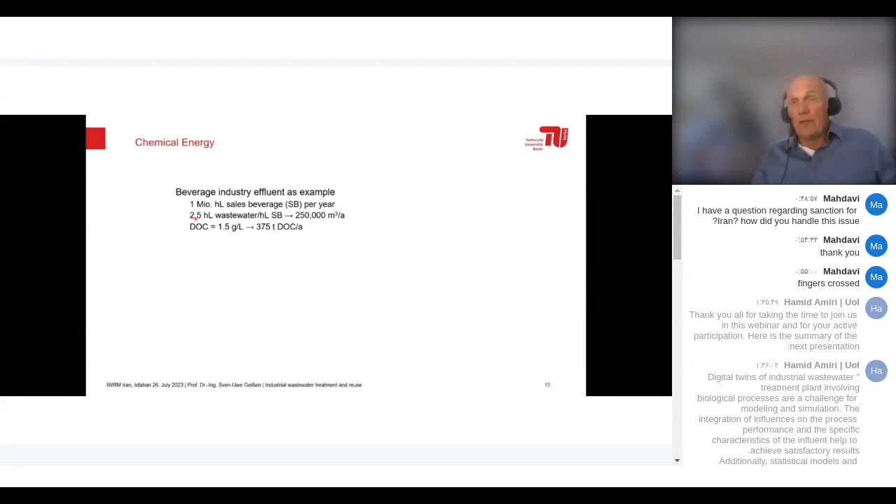The usual wastewater production is 2.5 - that's the mean value. You will find some factories with less than 2, some around 3 as the mean value. So 2.5 cubic meters of wastewater per cubic meter of sales beverage, ending up with 250,000 cubic meters per year. The DOC, the dissolved organic carbon, is in the range of 1.5 grams per liter or kilograms per cubic meter. You multiply these numbers and end up with 375 tons of DOC per year. So these are the basics.

And what you can do now is apply anaerobic treatment. There are some assumptions which are quite realistic: 80% removal efficiency, biogas production of approximately 0.75 kilowatt hours per kilogram DOC eliminated. You can double check these numbers - if they're wrong, come back to me, but the order of magnitude is okay.

So finally, it's 225,000 kilowatt hours per year which you can produce, equivalent to 20,000 liters of fuel oil per year, covering 1.2% of the beverage industry's needs in total.

Additionally, if you're applying anaerobic processes, those working with biological processes know this: anaerobic processes do not need aeration by definition. So you're saving a lot of aeration energy when removing carbon anaerobically. The side effect is that you're producing biogas, which can be utilized. So each and every time anaerobic processes could be applied, you should apply them.

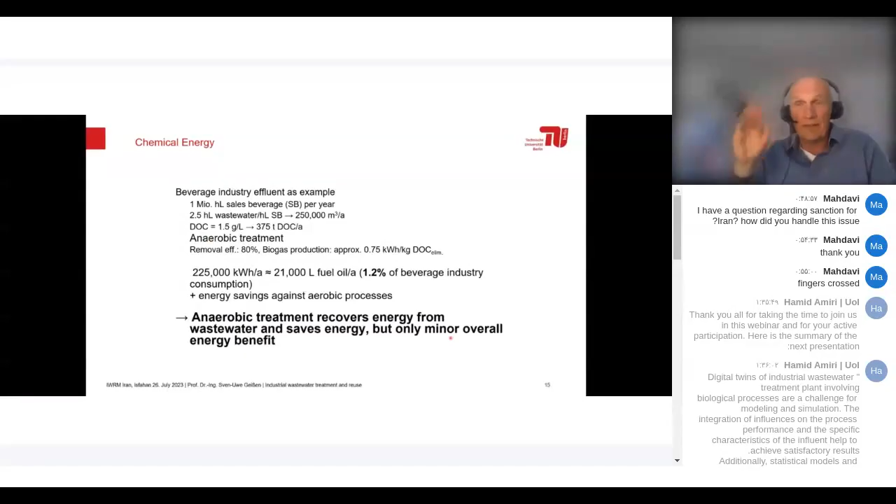There are some limitations and restrictions. You need a certain mass flow of DOC in order to apply anaerobic processes, and you need a certain concentration. You need a certain temperature, which should be above 30 degrees Celsius - I think that's not a challenge in Isfahan. These are some requirements, but generally, first check whether or not anaerobic processes could be applied. If so, apply them. That's the recommendation.

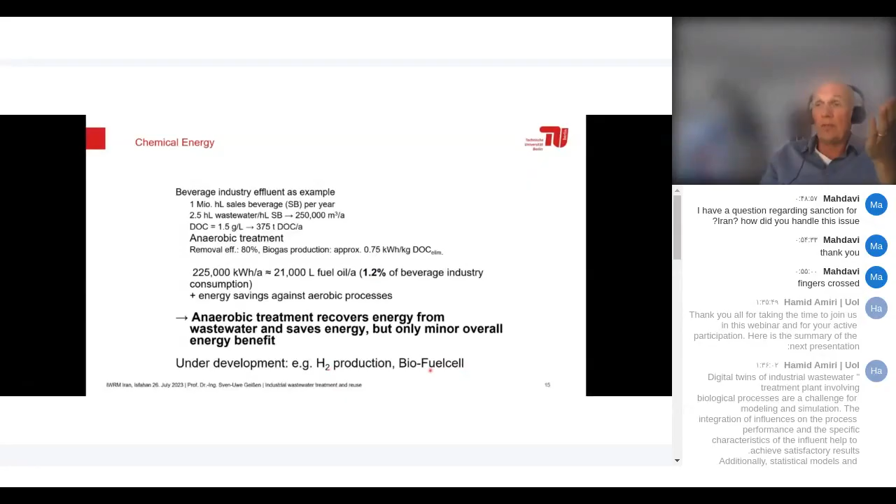It recovers energy from wastewater. You're turning the carbon in the wastewater into methane and carbon dioxide - 60% methane and 40% carbon dioxide. But generally, what we observe is only a minor energy benefit out of this. However, you can get a very simple and cheap treatment of the wastewater by anaerobic treatment.

There are some other processes under development. You can also anaerobically produce H2 - there are groups working on this. You can also use biofuel cells, but this is still under development.

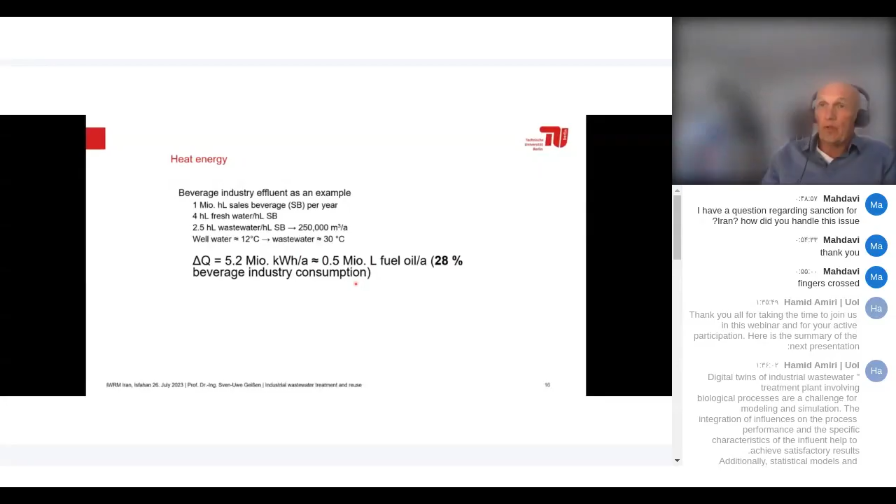If you look at the heat energy, same situation, same plant, same factory, in German conditions the well water is about 12 degrees Celsius - in your case it might be a little higher. Wastewater has 30 degrees, and just taking into consideration the temperature difference between wastewater and the supplied well water, we end up with 5.2 million kilowatt hours heat energy. It's just heat, not electrical energy - be careful. It's heat energy equivalent to 0.5 million liters of fuel oil, which is roughly 30% of the beverage industry consumption.

Again, be careful, it's heat energy. If you need heat, okay. If you don't need heat, you can forget these calculations because it's not electrical energy, just heat energy. This is just an example showing it's important to take the temperature into consideration, the enthalpy of wastewater or water, in all these calculations before making a decision.

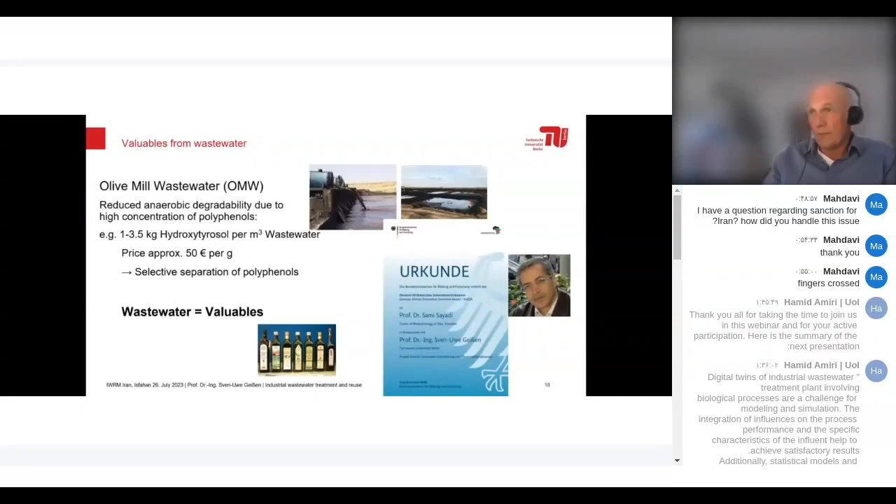So, organics - already mentioned by Jonas, I will just skip this, some pictures from Tunisia again. This is the olive mill effluent, which is nowadays still discharged into open ponds. Looks like this - dark brown ponds where the water evaporates slowly because we have a thin oil film on top of the water level, but nevertheless evaporation takes place, as well as infiltration into the groundwater. It's smelling and it's not a good situation.

These are some information about this, which has already been given by Jonas. It's the award which we received, Sami Sayadi and me.

So looking at water, now we are moving into industrial water supply and asking the question: where is the water coming from? It could be surface water, groundwater, tap water, or alternative water resources like processed wastewater. When we talk about wastewater recycling, we can also harvest rainwater, which is done in some industries in Germany, like Audi in Ingolstadt, or the airport in Frankfurt is also harvesting rainwater. But frankly speaking, it's only a small portion of the water supply that can be covered by rainwater.

And municipal wastewater - the recycling of municipal wastewater. We already have a project in Germany, 900,000 cubic meters per day in the northern part of Germany, where a municipal wastewater treatment plant is extended with reverse osmosis, and the reverse osmosis permeate is fed into the industry. So it's a project which already exists in Germany.

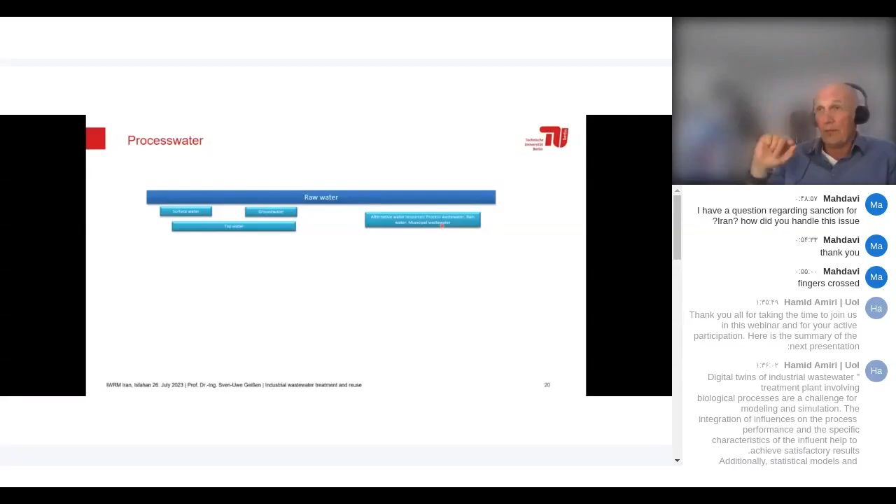A second argument for municipal wastewater is that the salt concentration is much lower compared to seawater. In the Gulf, we're talking about more than 4% salt concentration, sodium chloride. In municipal wastewater, it's maybe less than 1%, depending a bit on location, but this is the experience we made in Tunisia. So we have much less reverse osmotic pressure, and therefore the energy costs are much lower.

So when water must be treated for industrial applications, it can be treated by bank filtration, or if it's surface water: flocculation, precipitation, ion exchange, filtration, disinfection, distillation, membrane separation, oxidation and reduction. For example, in Berlin and Brandenburg, in the area surrounding us, we have to remove iron and manganese - that's a challenge here in the groundwater - and sulfate and nitrate. So finally, we are producing process water.

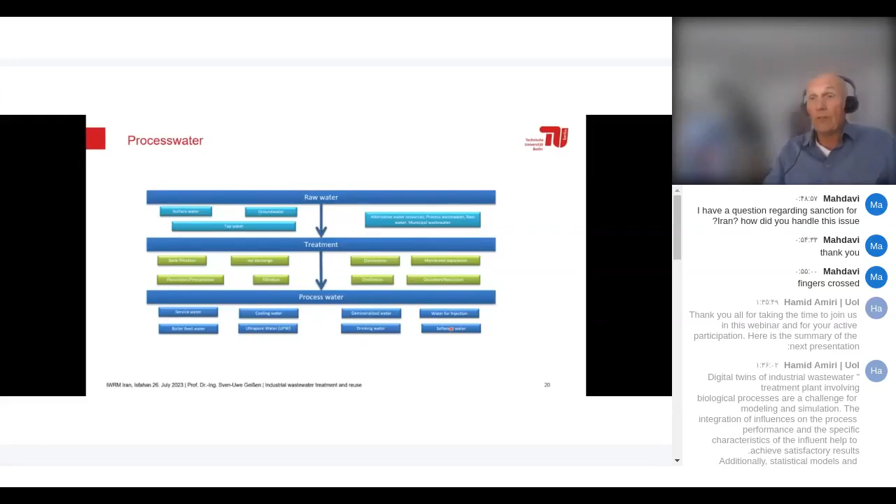It's important to look at what kind of process water is required - service water, not just for flushing or cleaning, or boiler feed water. We have requirements with respect to conductivity, because otherwise your boilers will be blocked with serious scaling, so conductivity should be less than 10 microsiemens per centimeter or so. We have cooling water applications, ultra pure water, demineralized water, drinking water, water for injection for the pharmaceutical industry, and softened water. So you can see different water qualities are required in industry, and that's a question which has to be addressed: what water quality is required?

So you can provide water from recycling which can cover these requirements. Different water qualities and raw water treatment increase the economic efficiency of water recycling.

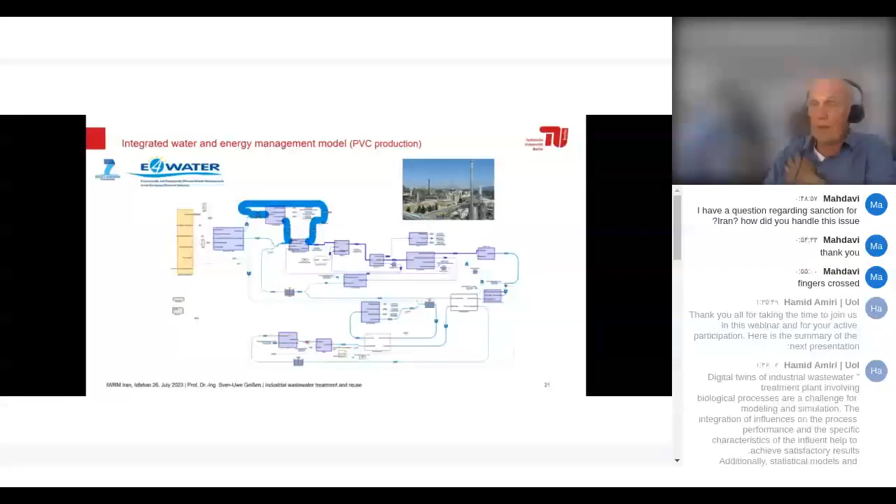And all this is coupled, and therefore simulation is very important. My colleague Norman Schweimans will go into detail later on with respect to the application of AI and simulation and control of those processes. So you can imagine that if something changes in the production facility, or something changes and you'd like to change something in the wastewater treatment or recycling unit, it influences the production process.

For example, if you're applying magnesium or alumina for precipitation in this treatment, you have dissolved alumina, and this dissolved alumina might cause a problem in the production. So it's essential to check the whole water scheme, the whole water flow, and to manage the whole water and additionally the energy flow inside production facilities.

Water recycling - this is an example from the beverage industry. As time is running short - not that time is running short, I'm just too slow, I have too much information - so in the beverage industry, usually pre-treatment takes place, then alkalization, acidification, which is very important, anaerobic treatment, flotation, aerobic treatment, again flotation, microfiltration, and reverse osmosis. But these processes, you all know, they're energy consuming and they're producing concentrates.

So we have the problem of salts, fouling and scaling on top of the membranes, and usually we're producing concentrates. Keep in mind, usually the recycling of water is limited - limited basically to the tendency of scaling of the water. So the hardness builders in the water are very essential, and this is something you can calculate easily in front of the design of those processes.

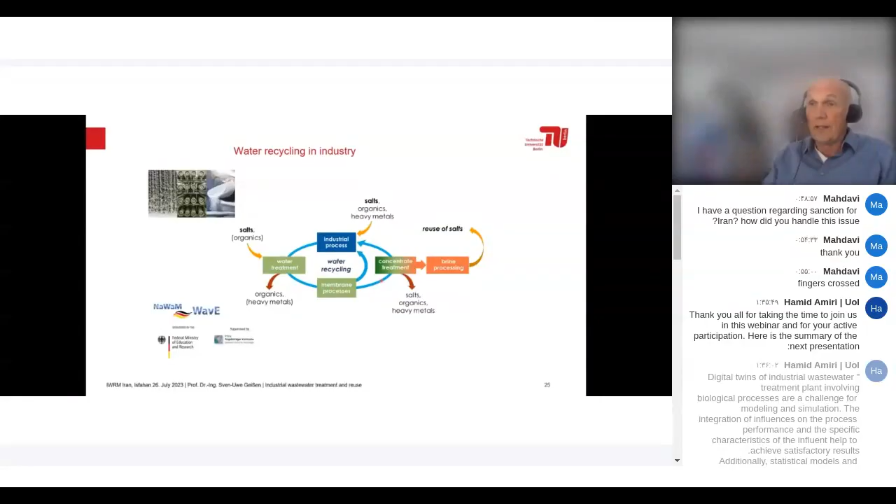So we have the salts - this is a production process. Here's the industrial process where we're adding salts and heavy metals. We have the water treatment, and again, we are part of the problem as water engineers because we are applying salts too - we use salts for precipitation, flocculation processes, etc. And they all finally end up in the membrane processes. The membrane process generally is very simple because it's just physically separating one flow from another.

So we have one flow entering the membrane process, as you can see here, and two flows leaving the membrane process. One is the permeate, high quality, no problem, we can apply directly. And the second flow is the concentrate. This is something we have to address, and which we have been addressing for roughly 10 years.

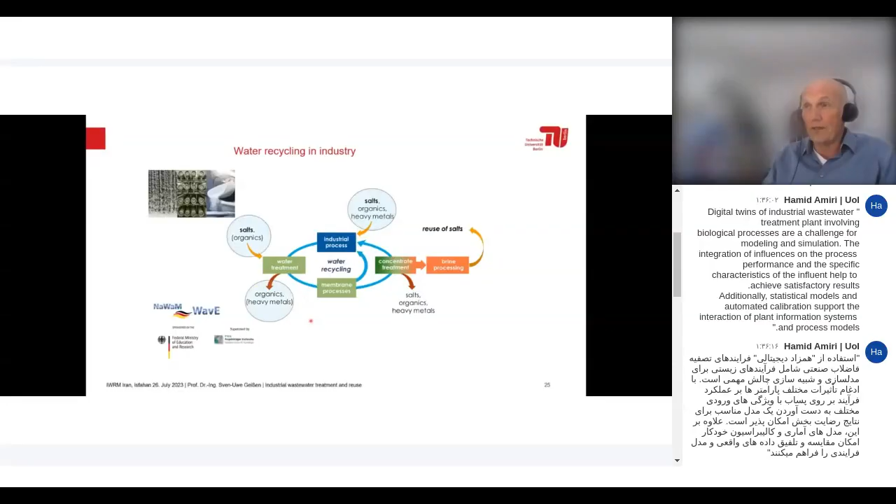The concentrate management, the concentrate treatment. Out of this, you can increase the water yield, so you can reuse more water, recycle more water back into the production, but you have to care for the brine processing. The best way, as already mentioned, is the reuse of the salts. But be careful, who needs such an amount of salts? Make the balance again: how much salt are you producing out of these water recycling processes?

That's the first step, we did it last time. I do not know which application, but you can easily produce 3 trucks per day of salts when you completely crystallize them, depending on the size of the plant and the industry you're looking at.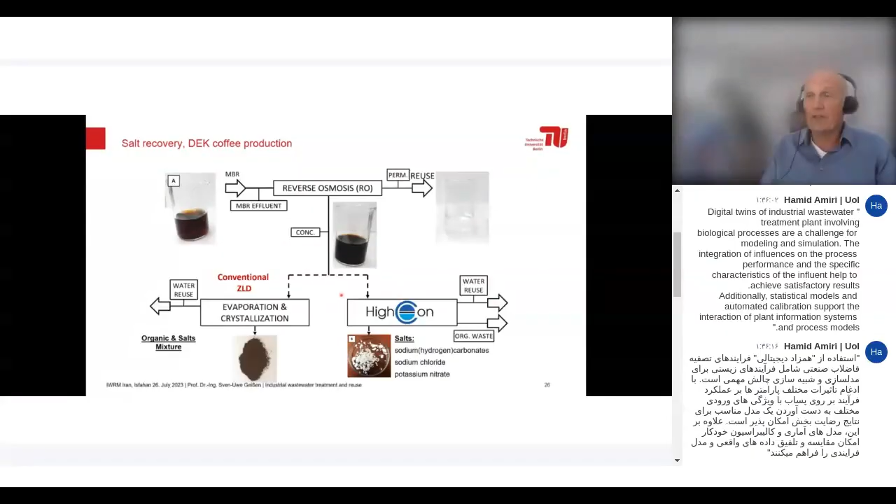So it's an example. We need clever management and treatment of the brines, which result not only from coffee production, but from all industrial processes where you're applying water recycling. This is also valid for other recycling processes or processes in general where you're applying membrane-based processes. Could be cooling water, could be drinking water. Wherever you're applying membranes, you're producing these brines.

And you have to think about what to do with the brines. You have to generate solutions. And what we are doing now, that's the team, the HighCon project team, with many industry partners, but also partners from research, from the Fraunhofer Institute, and authorities.

So what we are doing, if we have such a project, is making an estimation, the ion balance, metal concentration, composition of COD. We perform laboratory tests, and out of this we develop a preliminary process scheme and a rough cost estimation.

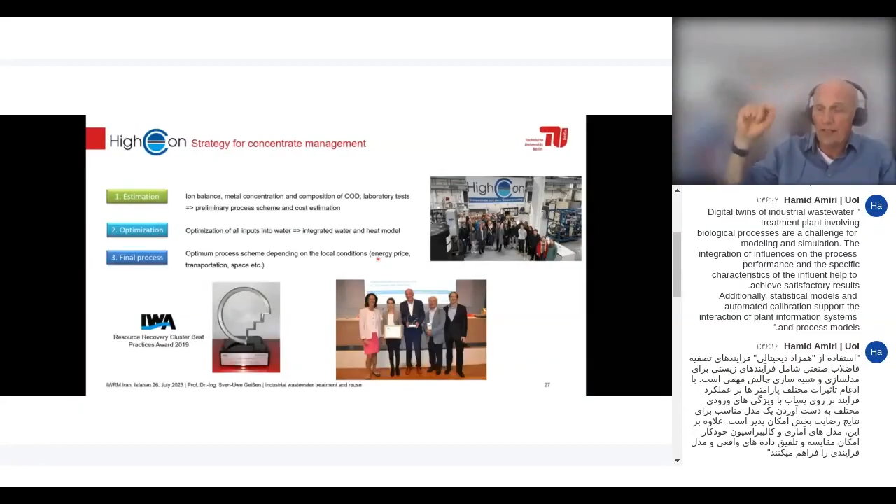The optimization of all inputs into water means we need to integrate a water and heat model. Out of this, we're moving one step back in order to see what can be prevented — that means the 3 R's. The first one, reduction: the reduction of salt intake, the reduction of heavy metals, the reduction of organics added to the water, and also reduction of water consumption or water use.

And then finally, the process, the optimum process scheme, depending on local conditions — depending, for sure, on the energy price, transportation, space, etc. We received the Resource Recovery Cluster Best Practice Award in 2019 from the IWA for this approach.

And now we are moving to the last chapter, which I will keep very short: the interaction between industry and the municipal wastewater treatment plant, which is illustrated here. So we have a situation today: we have the households, the municipal wastewater treatment plant, the industry here in this block, and agriculture here.

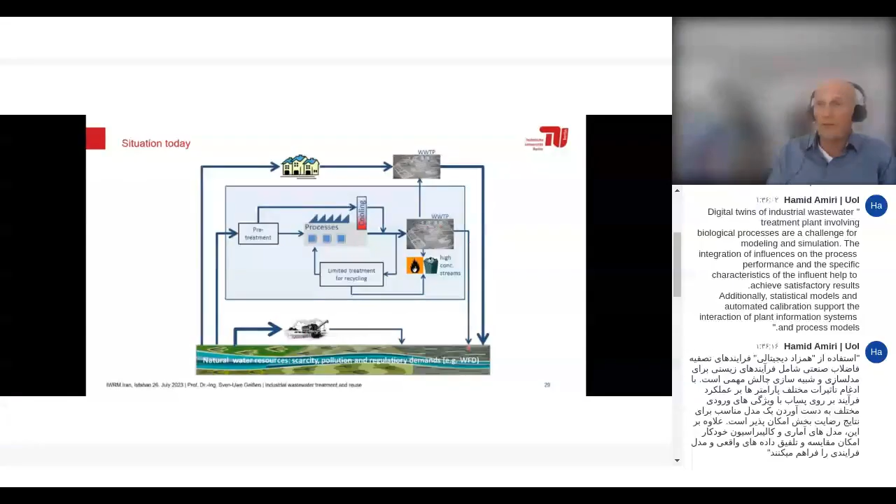So the largest amount of water, as you know, is used by agriculture, which partly is returned back into the groundwater or to the surface water, depending a little bit. We have the industry, which sometimes has a wastewater treatment plant and is discharging into the municipal wastewater treatment plant with or without pre-treatment, or could discharge directly into the surface water. This is the situation today.

And what we can think about, or what we are developing to, is a symbiotic approach. That means that we are catching all the rainwater, using alternative water resources. That means the water from the wastewater treatment plant back into the production in order to generate alternative water resources, but also for agriculture, because this wastewater contains a lot of nitrogen and phosphorus, the nutrients required for agriculture. That's an approach.

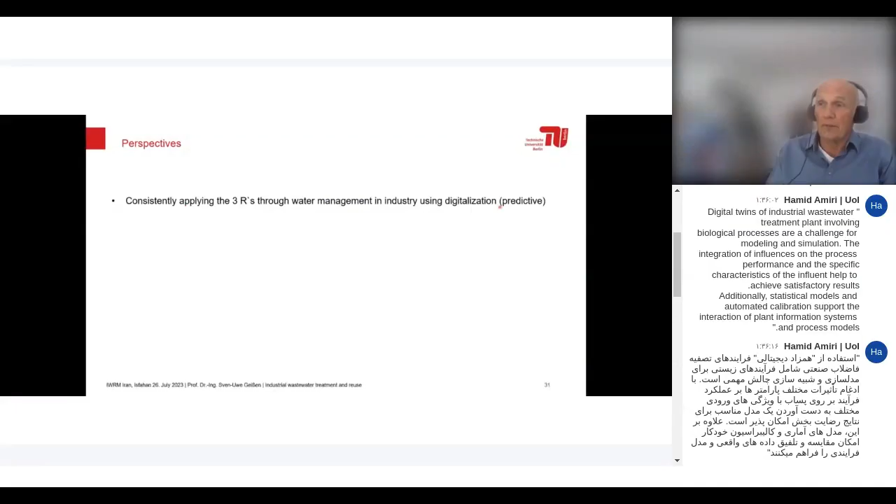But additionally, you also have to focus on internal recycling processes. We call it production integrated recycling of water. So go into production facilities and look where you can recycle or reuse the water directly. But also as the end of the pipe solution, you can treat it so you can use it. And additionally, if you have other processes, for example an industrial park, the effluent of one industry could be the influent for the other one. So the so-called symbiotic reuse or recycling of water.

Yeah, what are the perspectives consistently applying the 3 R's which I mentioned? Reduce, reuse, and recycle through water management industry using digitalization. Predictive monitoring might be an option. Regulate discharge of readily biodegradable materials, so this makes sense that the wastewater treatment plants, the biological wastewater treatment plants, are doing this job.

In-plant recycling and use of highly concentrated streams in anaerobic sludge treatment is a good option. Option of using the clear flow of municipal wastewater treatment plants for industry. You have high quality water infrastructure. You have the people who are managing these processes with respect to the concentrates, the cost, and sustainability. You have everything there that might be an option to produce the water over there with high quality or different qualities.

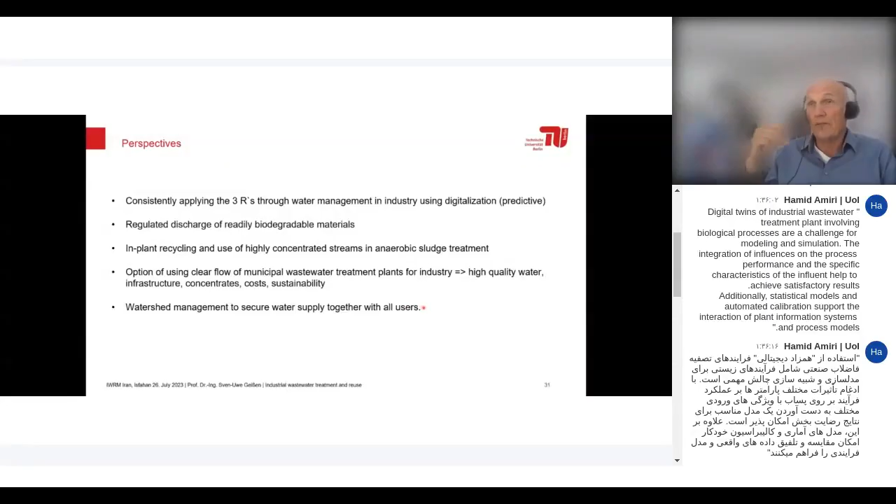The only challenge which remains is the logistics, because as soon as you're recycling water, you don't have to forget, you need a lot of pipelines, you need a lot of storage, you need a lot of pumps. And you have a certain risk with respect to biological contamination, the growth of microbes, Legionella for example. And these are some concerns which you have to take into consideration while designing such a recycling system.

And watershed management or integrated water resource management to secure water supply together with all users, directly addressed by this process, the integrated water management, water resource management in the Zayandeh Rud basin.

Yeah, thank you very much. That was my presentation. We have an international team, I am in the group, so from different countries, and yeah, looking forward to your questions.

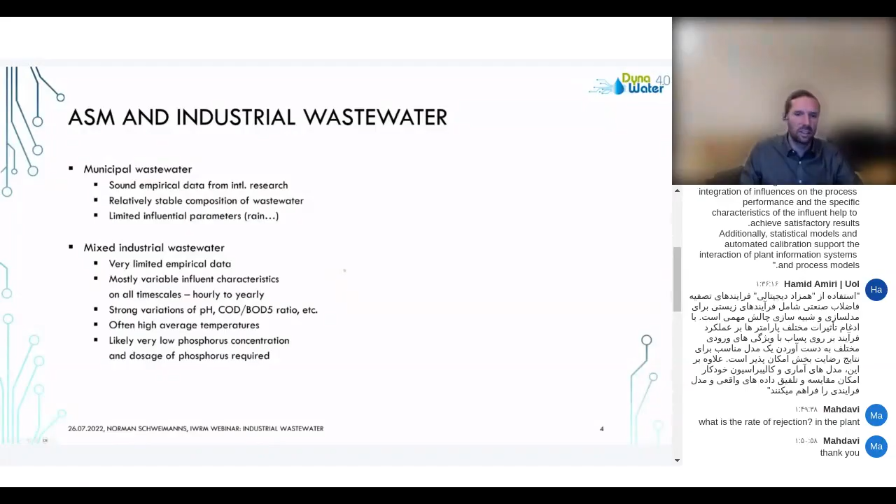Or other contaminants, chemicals, whatever. Then you often have, because of cleaning processes and stuff like that, variations in pH, and again because of the production, a very variable rate of biodegradable COD, so BOD5. This changes again, and this all requires adjustments to your model if you use those activated sludge models. In addition, high temperatures and low phosphorus concentration and so on can make your life really hard.

In our use case - if you wonder why do we even think about it - we have some huge production parks in Germany, and this one we were looking at is 7.5 square kilometers. It has 25 kilometers of sewers, and the influent treated in the wastewater treatment plant comes from 100 different productions, and each of those 100 different productions does batch production, with changing batches and different cleaning programs.

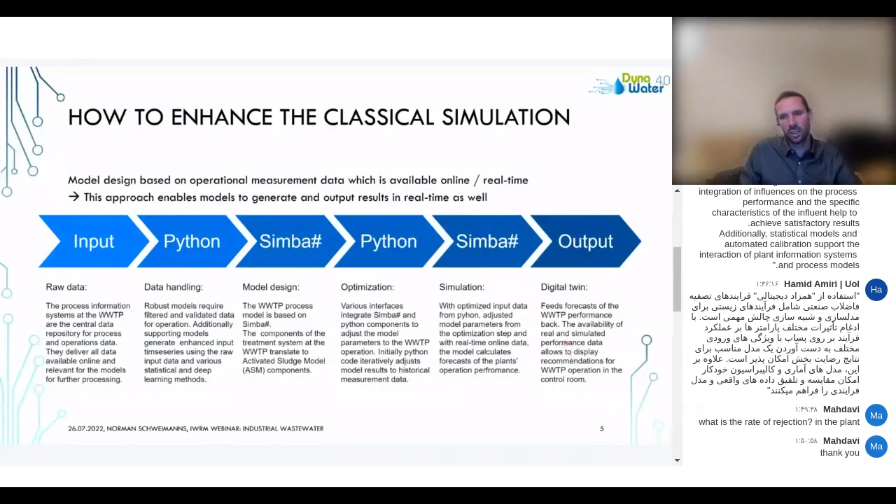And then we looked at how we can optimize all the different parameters of those models, and found a way to integrate, on the one hand, statistical models, and on the other hand, those classical activated sludge models, to have some kind of artificial intelligence solution to adjust a model in a way that it can somehow work like a digital twin. And this information that is produced by the final model can then be fed back to the process information system and even to the control room. But more on that later.

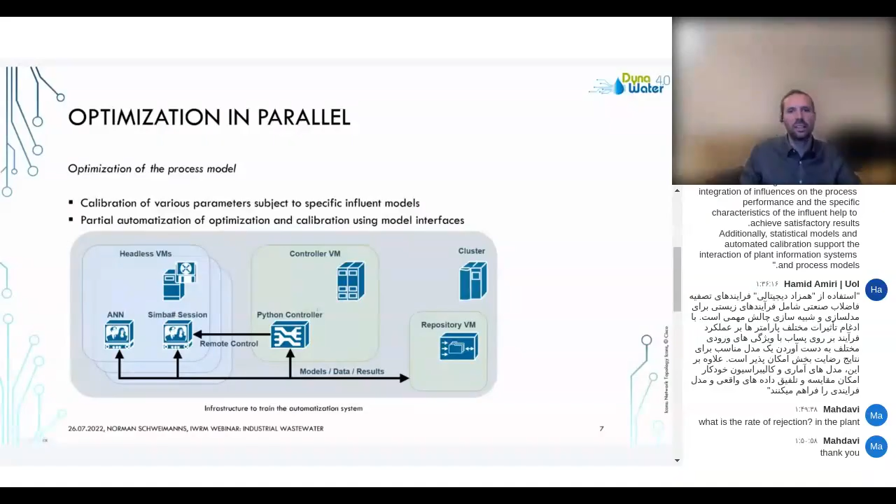If you now think about doing a sensitivity analysis for all of them on your own, you will spend half of your life just doing that. So that's why we thought about an infrastructure where it says Simba Sharp Session, where we had a system of virtual machines, virtual computers that run those models, and a controller that does all the sensitivity analysis for us.

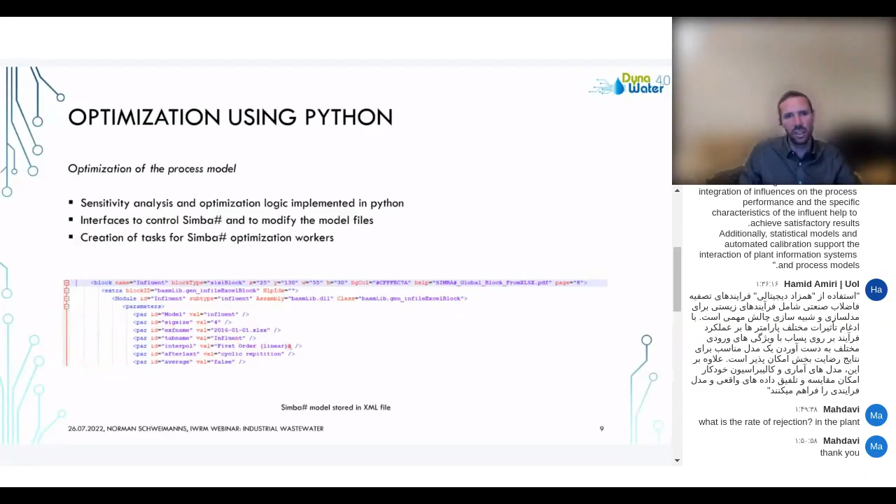But to have a good result, you have to do it a lot of times for different influential parameters. And that's why we use kind of interfaces between the software that does the ASM stuff, Simba, and our logic in Python. There are briefly different ways to do it. On the one hand, the Python library takes or draws the data from Simba to do all the calculations and comparisons. And on the other hand, it writes to the configuration of the model file to make the changes that are necessary to improve the model.

This also allows us to do a global sensitivity analysis. That means analyze the sensitivity of all parameters that are in the model or a subset of those parameters, and also get an insight into how the change of one parameter influences the change of another parameter.

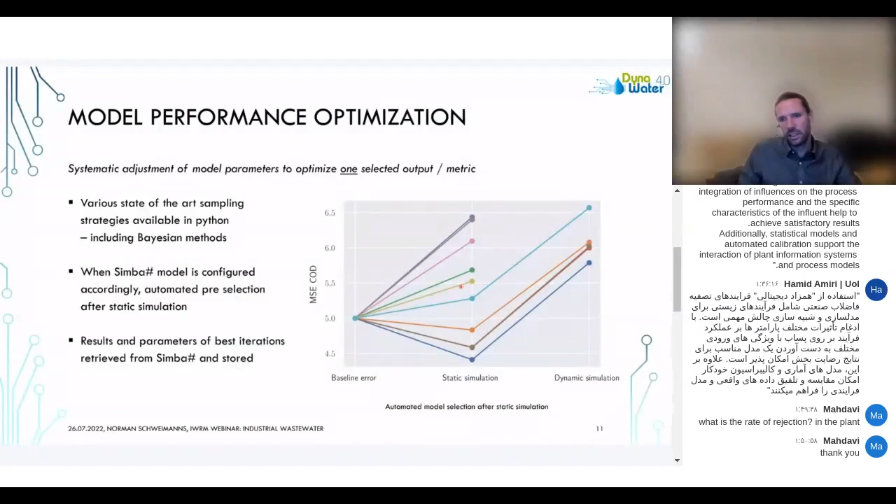And in the next step, when one parameter is selected for optimization, we use the interfaces to vary the value of this parameter and do different simulations with kind of a break rule. So if the results of the first step of the static simulations are already worse than the other ones we had before, then the second step, the dynamic simulation, which is a much more time-consuming and CPU-consuming step, is just not done.

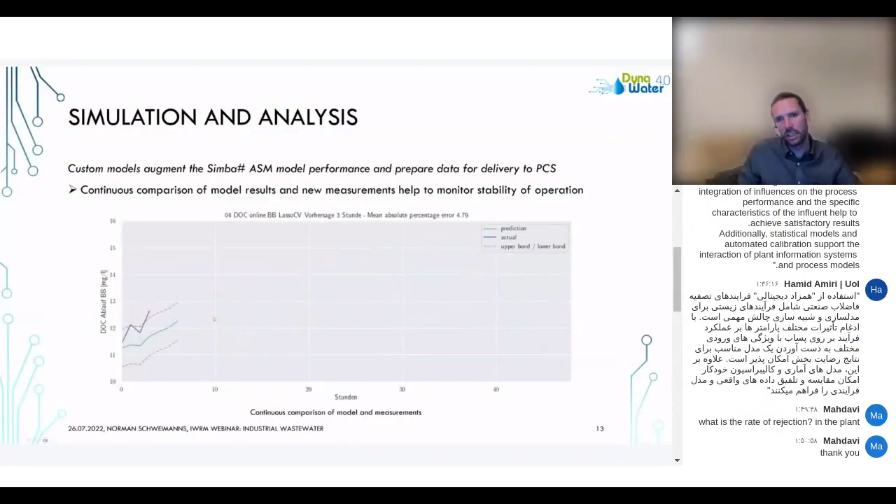You can see that here. The green line gives a preview of the next 3 hours, and the blue line is the real measurement. It's not perfect, but here you can see it again: the green one is a prediction, the blue one is a measurement that followed on later.

For a good number of parameters, you can have good results with statistical modeling when the input data is cleaned and stable and there are not too many errors in the measurement.

To summarize, when, like in this industry, the influent characteristics keep changing constantly, the creation of a digital twin is complex, to say the least, because the simulations are only stable for defined operational states. Like in municipal wastewater treatment, it's easy, but then static simulation is not sufficient. You need to dynamically adjust your model, otherwise it will work maybe for a day or two, and then the results of the model will differ a lot from what you measure.

So those were the basic steps again, going beyond what I've shown in the beginning: the model design and validation, which was basically in the first flow chart. Then we characterized model performance by metrics, those shown in the multi-criterial optimization, so you can look at different performance indicators at the same time and select your parameters, then use them automatically in conjunction with continuous comparison of model and reality to adjust the model accordingly.

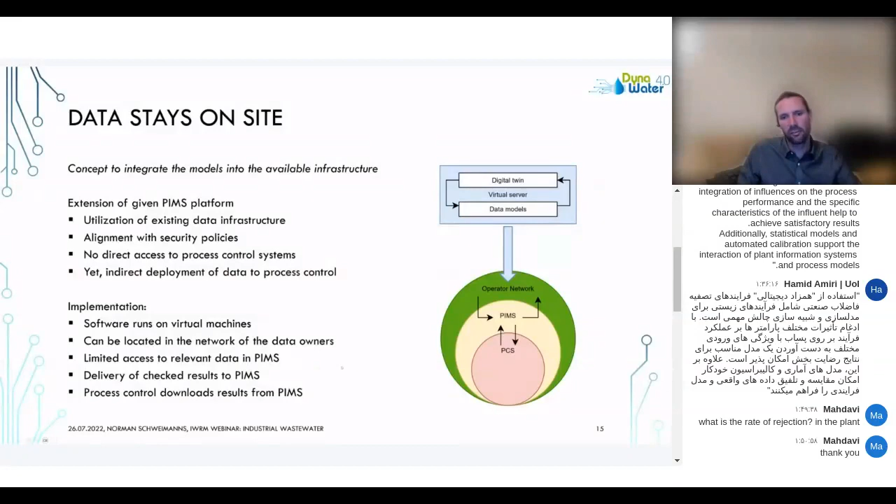One of the big benefits of this system is, and maybe you have thought, why don't they just send it to some cloud, this cloud, that cloud, whatever cloud? We are working with industry and they don't want to share their data with anyone. So that's something we had to take into account. We had to work with existing structures and data management systems, and implemented virtual machines located inside the network of the data owner, so everything stays on site. We also only accessed relevant data of the information system and could give it back, so the control room would take our data themselves. We had no active access to the process control system, which is very important for security.

And that brings me to the summary. The integration of plant operations and models is surely beneficial on multiple stages. The first and most important step is hardened data. For every step in production, it's very beneficial to have better data. If you know your data, you can easily spot errors in machinery and plants. It's always good to have hardened data, and it's the first and most important thing you need for digitalization and digital twins.